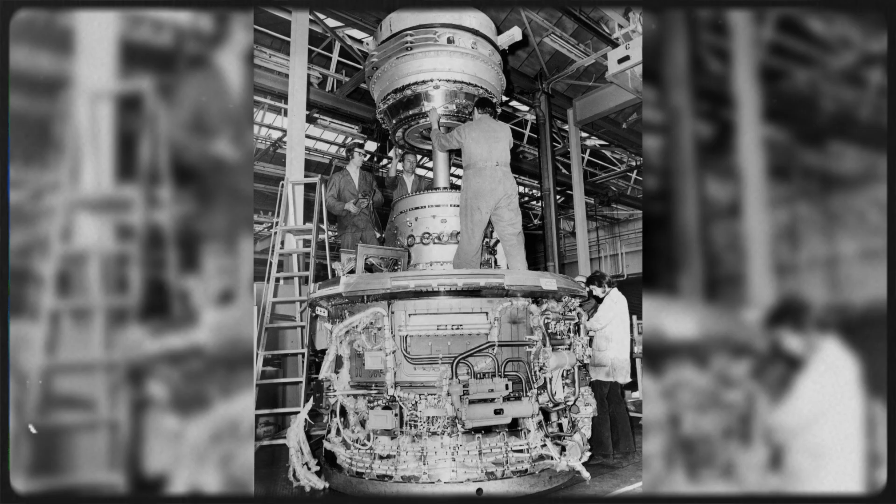In 1960, on the concrete apron of London Heathrow, British mechanics prepared a massive cylinder of aluminium and steel for installation. It was the Rolls-Royce Conway, built in the Midlands by an engineering culture that had defined the sound of the Second World War. But this engine was not being bolted onto the wing of a British airliner. It was being fitted into the nacelle of a brand-new American Boeing 707.

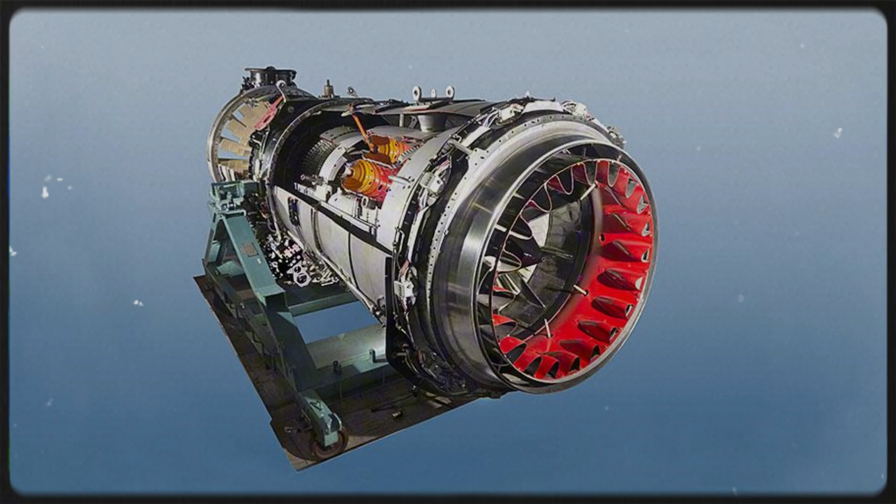This was not merely a transatlantic export order. The Conway was the first commercial turbofan engine in the world. By splitting the intake air, forcing a portion through the fiery combustion core, and bypassing the rest smoothly around the outside, Rolls-Royce had instantly made earlier, deafening pure turbojets obsolete. It delivered unmatched fuel economy and thrust, finally giving American airframes the true intercontinental range that global fleets demanded.

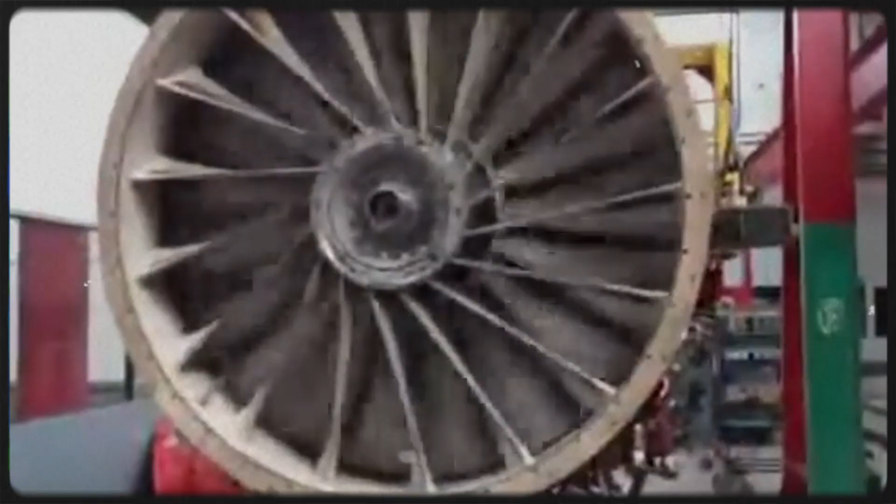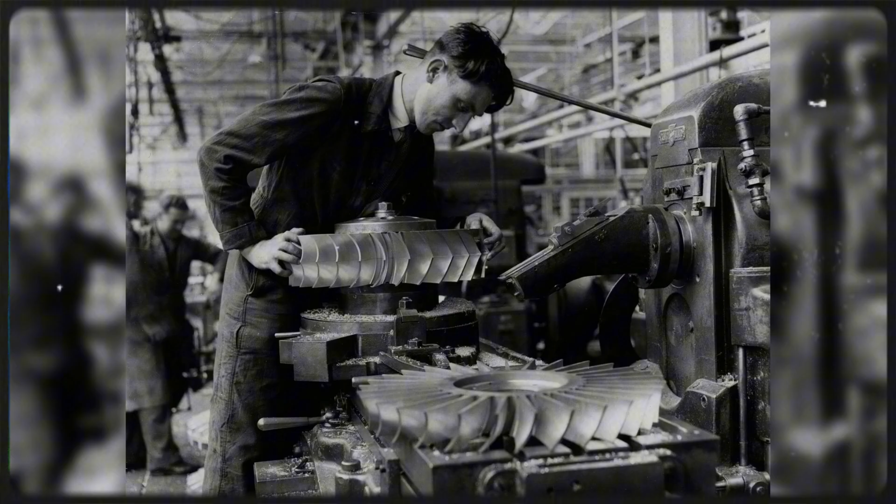For the engineers in Derby and the maintenance crews working on the Heathrow tarmac, the Conway represented absolute technical supremacy. They had solved the mathematical limits of the early jet age. Yet, beneath this mechanical triumph, a quiet industrial surrender had occurred. British foundries and machine shops were now supplying the heart of the very American aircraft that would soon dismantle Britain's own commercial aviation ambitions. That was the paradox of the Conway.

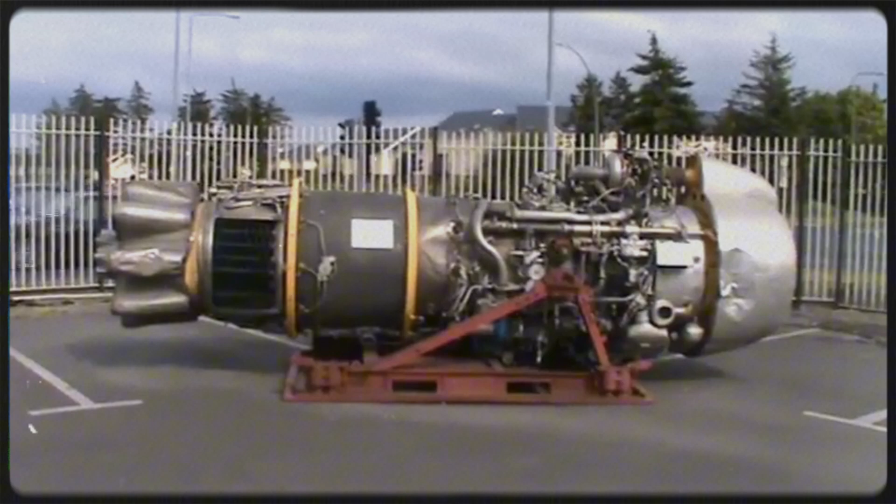Britain had cracked the bypass code. The engine ran quieter, flew further, and dictated the new economics of global passenger travel. But the British industry was about to learn a brutal lesson in economies of scale. Owning the invention did not mean possessing the power to control the market. But the real story of the Rolls-Royce Conway is not only the story of a technological first, it is the story of how Britain built the bridge to the modern jet age, only to find they could not afford to cross it alone.

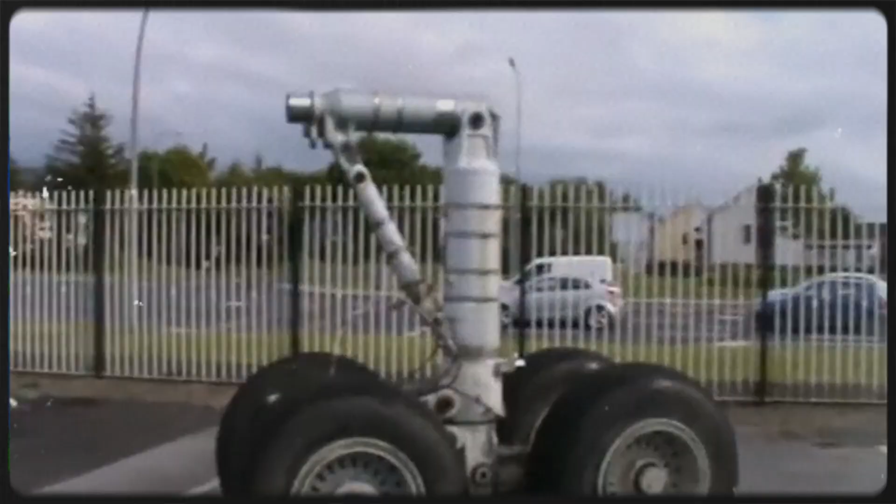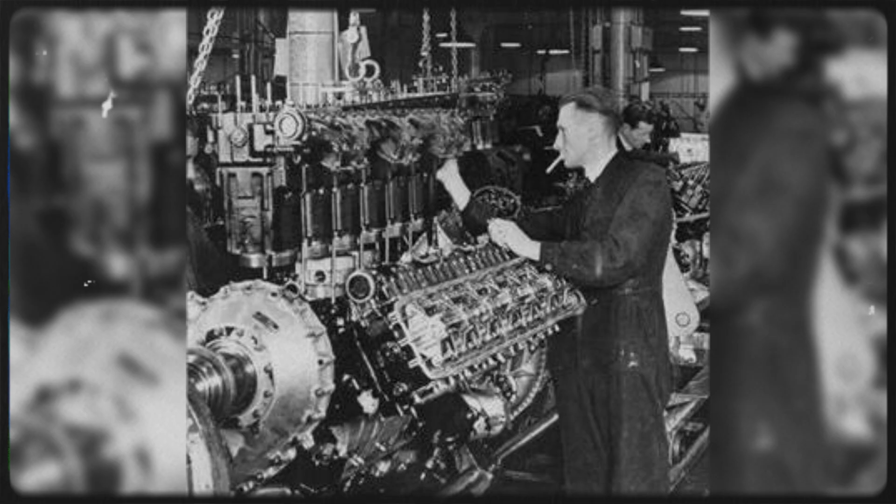The story begins not with nostalgia, but with a specific place. In a Derby test facility, in 1946, the story of the Conway begins in the town of Derby in the late 1940s, inside the engineering offices of Rolls-Royce. Derby was not merely a manufacturing base, it was the foundry of British aviation power, the industrial heartland that had produced the Merlin piston engine and kept the country in the sky during the Second World War.

But the piston engine era was ending. The future belonged to the jet engine, a turbine engine that produces thrust by accelerating air and exhaust gases. The early jet age was defined by the pure turbojet. A pure turbojet works by sucking all incoming air into the compressor, forcing every ounce of it through the combustion chamber and blasting it out the back as a high-velocity exhaust stream.

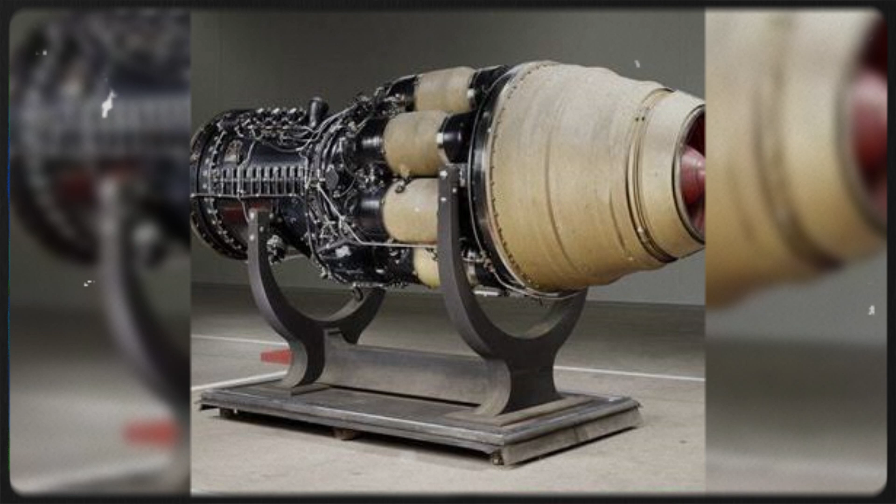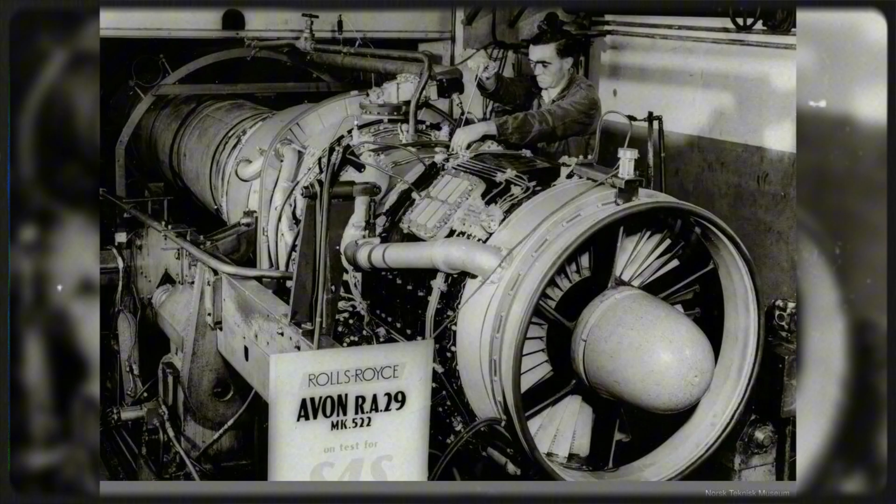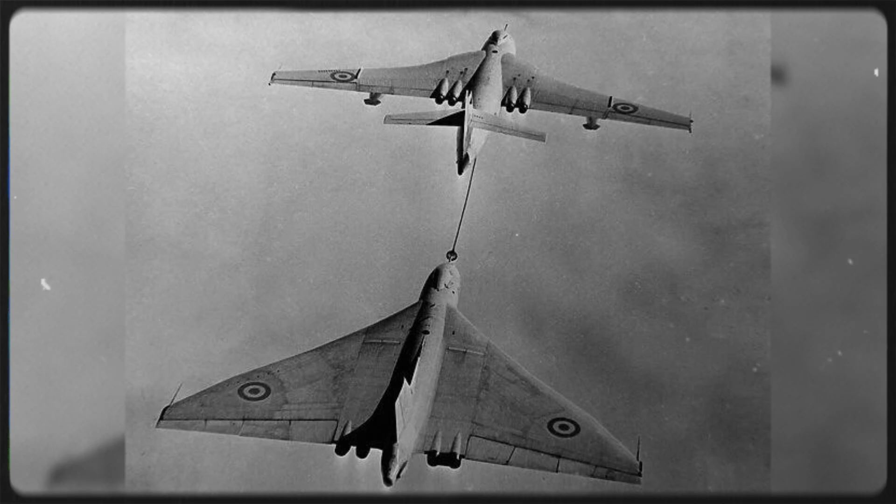It was a brutally simple way to make an aircraft go fast, and Rolls-Royce had mastered it with engines like the Avon. But the pure turbojet had a fatal industrial flaw. It was immensely loud, and it consumed fuel at a staggering rate. In the austere, rationing-heavy years of post-war Britain, fuel efficiency was not an environmental concern. It was a matter of strategic survival.

The Royal Air Force was developing its V-bomber force, a fleet of strategic nuclear bombers designed to carry heavy payloads deep into Soviet territory and return safely. The most advanced of these was the Handley Page Victor, a sweeping, crescent-winged heavy bomber that needed to fly higher, faster, and further than any British aircraft before it. The pure turbojets of the era simply drank too much aviation fuel to guarantee that intercontinental range. Britain needed a mechanical solution that did not yet exist.

The answer came from Dr. Alan Arnold Griffith, a brilliant and notoriously uncompromising aerodynamicist at Rolls-Royce. Griffith had been exploring a theoretical concept known as the bypass principle since the 1940s. His idea was elegantly counterintuitive.

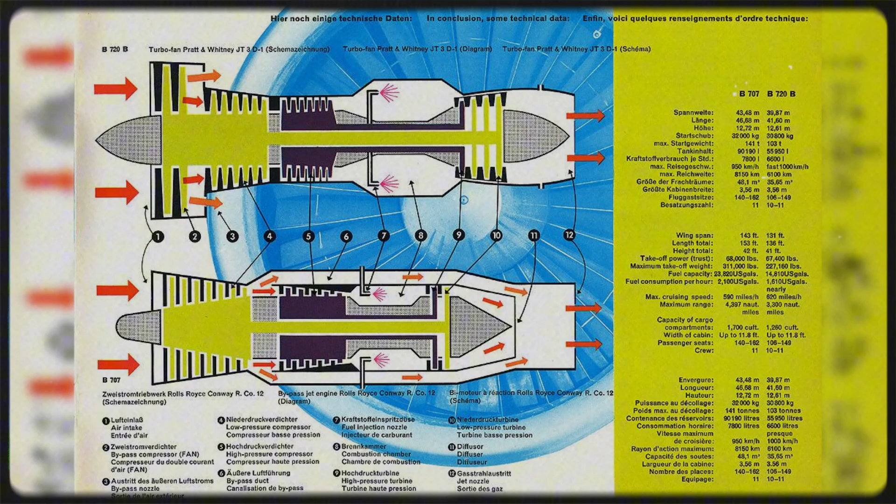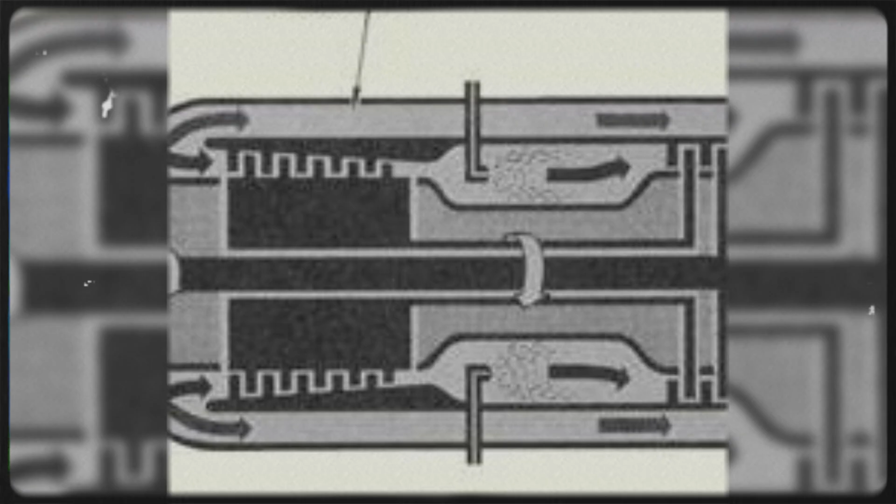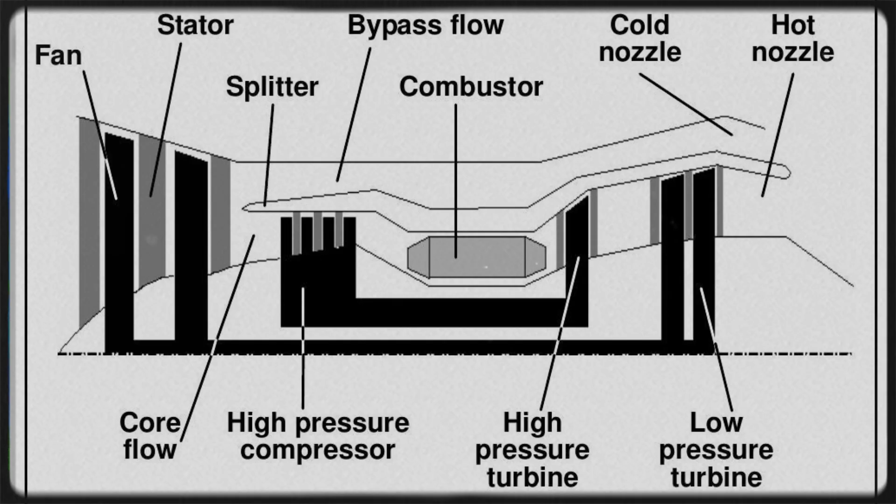Instead of forcing 100% of the ingested air through the fiery combustion core, the engine would have a larger front compressor. A portion of the air would be compressed and fed into the core to be burned, while the remainder would literally bypass the core, flowing through an outer duct before mixing with the hot exhaust at the rear. This cooler, slower bypass air would wrap around the hot, fast exhaust like a sleeve. The physics dictated that moving a larger mass of air at a slower speed was far more fuel efficient than moving a small mass of air at a very high speed.

It also had a secondary, almost accidental benefit. The layer of slower bypass air muffled the violent shear of the exhaust, making the engine significantly quieter. But a theory on a chalkboard in Derby was not a working machine. To build a bypass engine, Rolls-Royce could not use a simple, single-shaft layout.

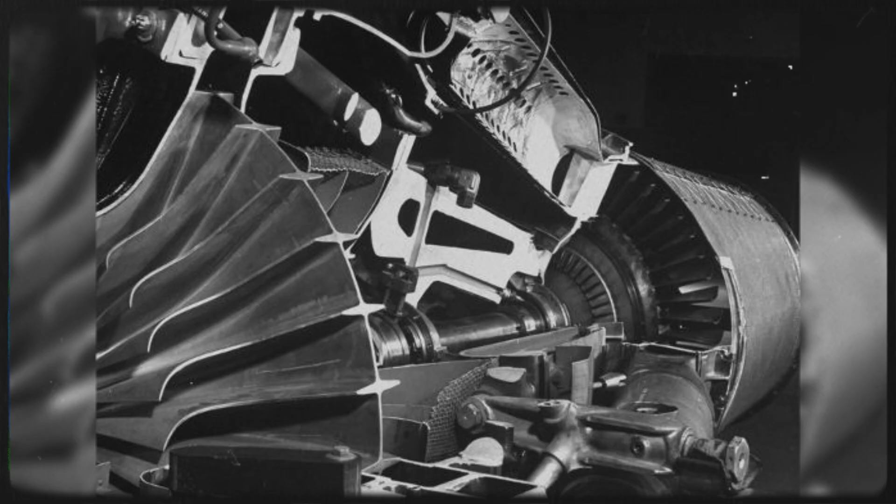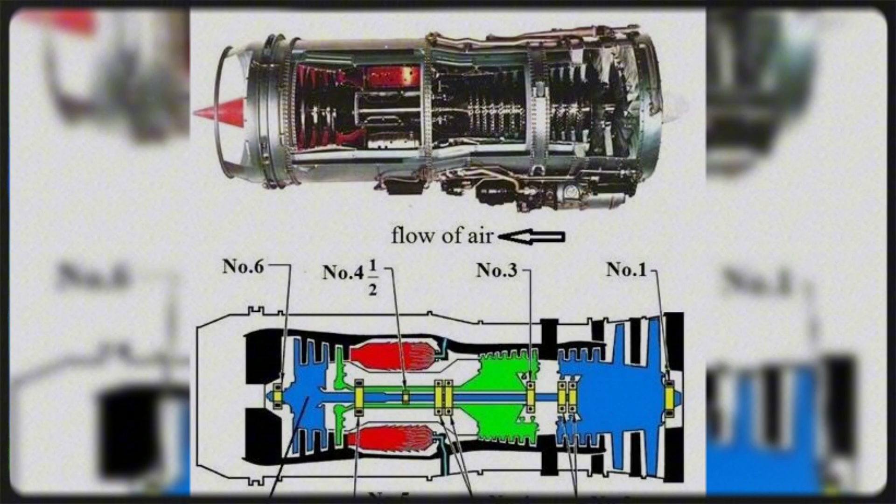The engine required a twin-spool design, an internal layout using two concentric shafts, allowing the low-pressure compressor at the front and the high-pressure compressor in the core to spin at different, optimal speeds. This meant placing a rapidly rotating metal shaft inside another rapidly rotating metal shaft, all operating under immense heat and stress. It demanded unprecedented precision from the foundries and machine shops of the Midlands.

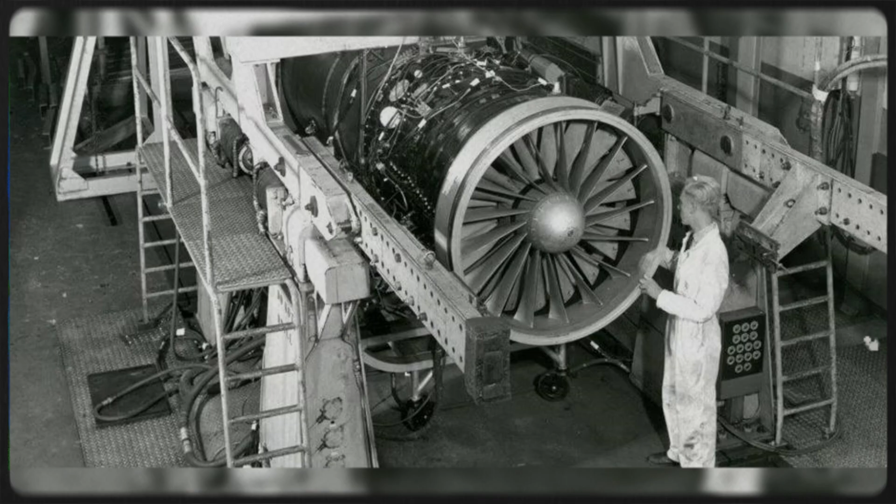The metal had to be cast perfectly. The bearings had to survive. The service network of RAF mechanics would have to learn how to maintain an entirely new architecture of power. The physical reality of the Conway began to take shape on the test stands. In October 1952, the first prototype, designated the RCO-2, was fired up in Derby.

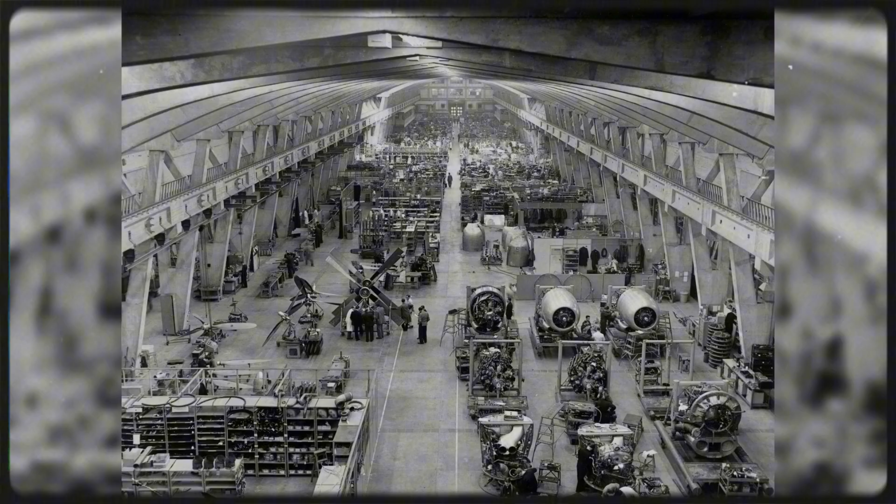It produced just 10,000 pounds of thrust, a measurement of how much forward-pushing force the engine could generate. It was a modest figure, and the prototype was plagued by the complexities of its twin-spool bearings and internal sealing. But it proved that the mathematics of the bypass principle were sound. The fuel consumption was undeniably lower than any comparable turbojet.

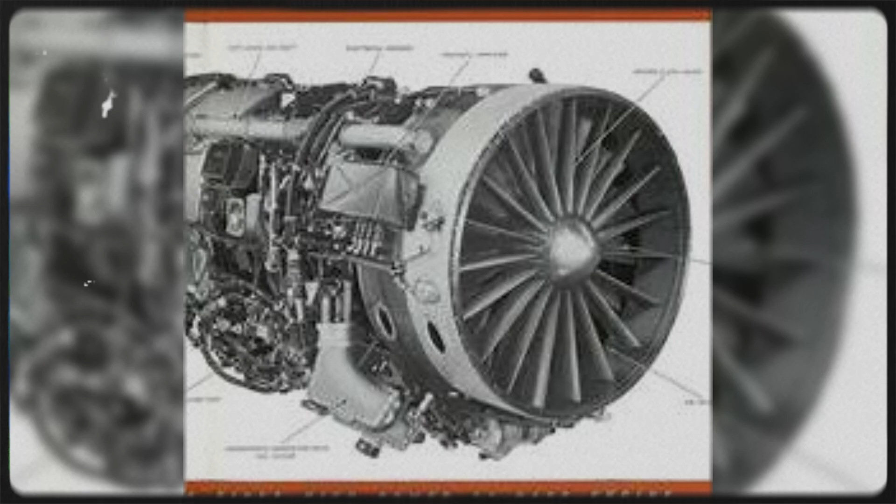Rolls-Royce pushed the development forward, scaling the architecture to handle more air and more heat. By 1956, the design had evolved into the RCO-11, an engine capable of producing 17,250 pounds of thrust. This was the breakthrough the military needed. The RCO-11 was ordered into production for the Handley Page Victor B-2, giving the RAF the long-range strategic reach it had demanded. The Conway was officially a working piece of British defence infrastructure, integrated into airfields, maintenance hangars, and the daily routines of military mechanics.

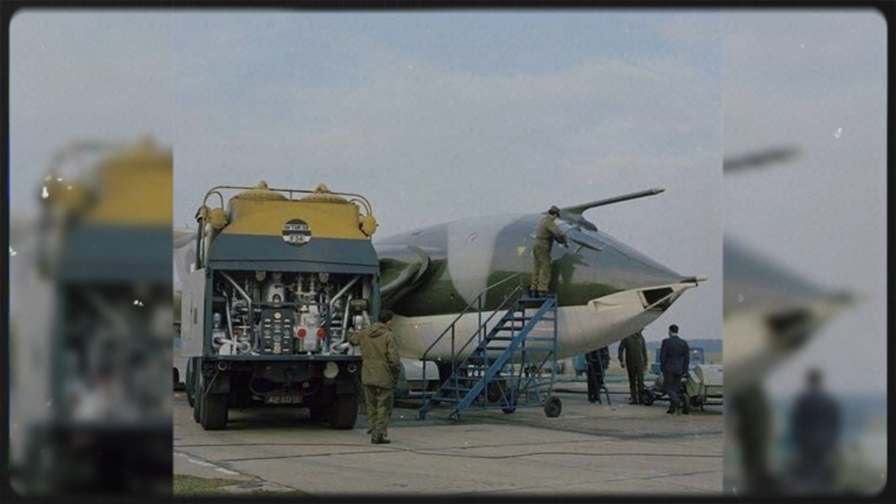But military contracts alone do not build global industrial empires. As the Conway was being perfected for the bombers of the RAF, the commercial aviation market was experiencing a violent shift. Across the Atlantic, American manufacturers Boeing and Douglas were designing the 707 and the DC-8, the first generation of large intercontinental passenger jets. The airlines buying these aircraft had a very specific economic problem. They wanted to fly passengers across the Atlantic Ocean, from London to New York, without stopping to refuel in Newfoundland or Ireland.

The pure turbojets offered by American engine manufacturers, such as the early Pratt & Whitney JT3C, were struggling with the exact same physics the RAF had faced. They were too loud for civil airports, with strict noise regulations, and they were too thirsty to guarantee a non-stop transatlantic crossing with a full payload of paying passengers.

In Derby, the engineers realized that Griffith's military project was actually the exact solution to the global airline industry's most expensive problem. The Conway was no longer just a classified bomber engine. It was a product ready for export, built by a Midlands workforce that suddenly held the key to the global commercial jet age. The theory was proven on the test stands in Derby. Britain now had to convince the world that the future of flight lay not in pushing all the air through the fire, but in letting some of it slip quietly around the sides.

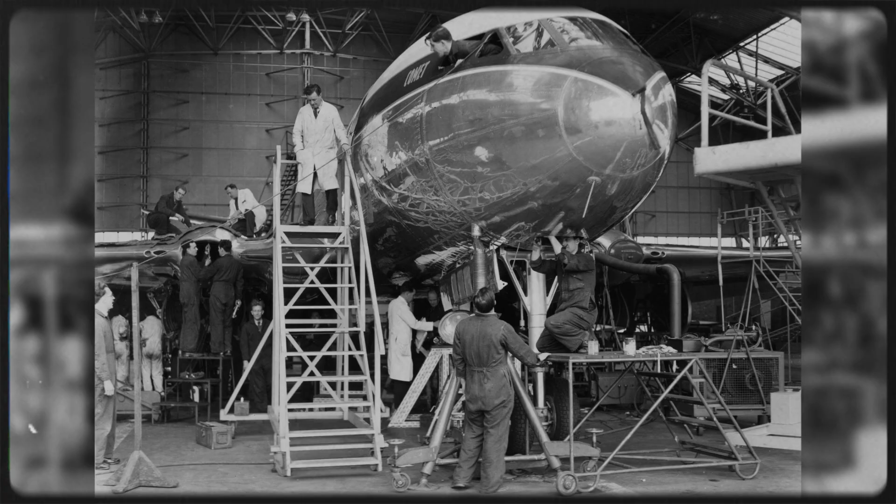To understand what the Rolls-Royce Conway achieved, you must stand not in a laboratory, but on the concrete apron of a British Overseas Airways Corporation, or BOAC, maintenance hangar at London Heathrow in the late 1950s. At that time, the sound of the jet age was defined by the pure turbojet. Engines like the Rolls-Royce Avon or the American Pratt & Whitney JT3C produced thrust with a violent, concentrated scream that rattled the windows of terminal buildings and shook the tools on a mechanic's workbench. They were magnificent, but they were viciously loud and notoriously thirsty.

When the Conway arrived on the tarmac, the sensory experience of British aviation fundamentally changed. The Conway was a turbofan, a jet engine that moves much of its air through a large fan, improving efficiency and thrust. More specifically, it was a low-bypass turbofan. To a mechanic standing near the runway, the difference was immediately audible. The high-pitched, tearing shriek of the pure jet was replaced by a deeper, heavier roar.

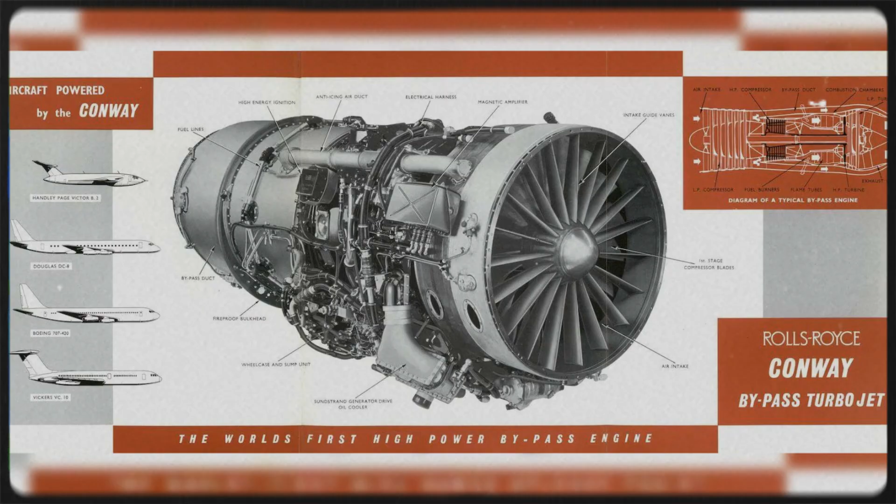The physics of Dr. A. A. Griffith's design were acting as an acoustic blanket. By wrapping a sleeve of cooler, slower-moving air around the incredibly fast, white-hot exhaust of the engine core, the Conway muffled the violent shearing effect where the exhaust met the static atmospheric air.

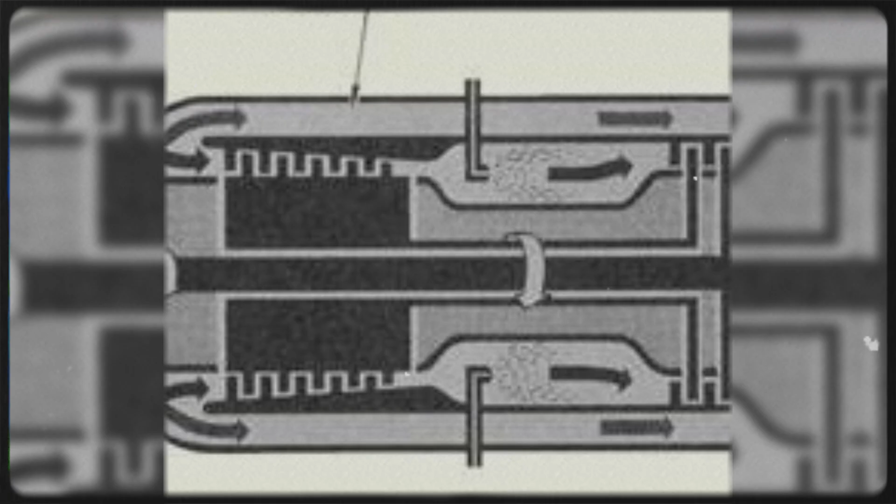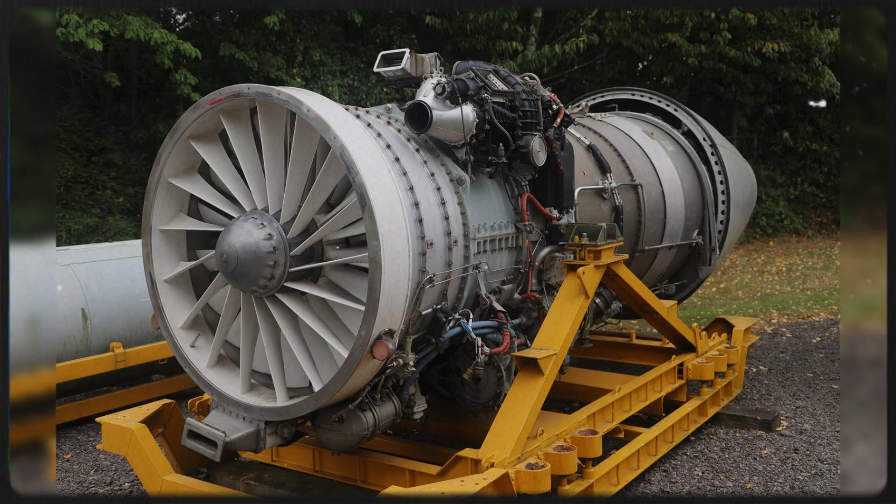This acoustic shift was driven by the engine's bypass ratio, the mathematical relationship between the volume of air directed around the core and the volume of air forced through it to be burned. In the early commercial Conway, this ratio was roughly 0.3 to 1. By modern standards, this is a tiny bypass volume, but in 1959, it was a revolution. It meant that Rolls-Royce had found a way to extract more pushing force from every gallon of aviation fuel.

But this breakthrough in thermodynamics demanded a heavy price in mechanical complexity. For the service network, the dealers, mechanics, parts suppliers, and manuals that keep a machine running after purchase, the Conway presented an entirely new world of maintenance.

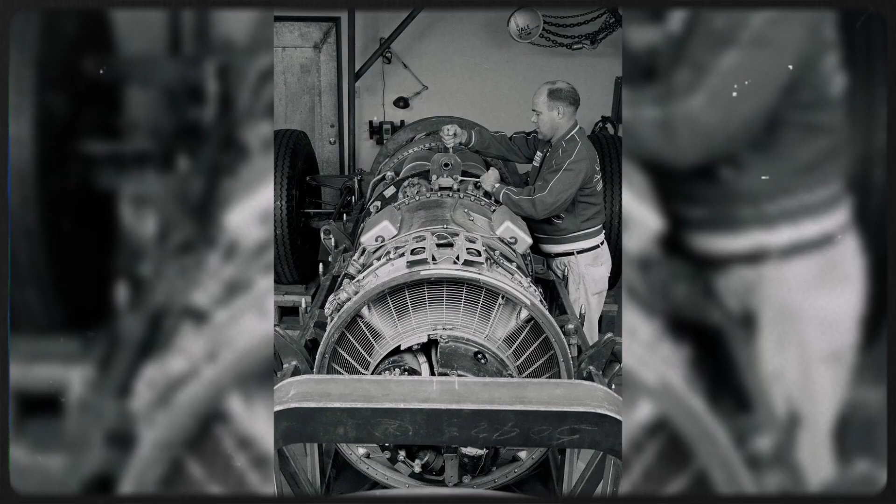A pure turbojet relied on a single rotating shaft. The Conway relied on a twin-spool architecture. It contained a low-pressure shaft running directly through the hollow center of a high-pressure shaft. In a British workshop or hangar, this meant that an overhaul, a major service process where an engine is taken apart, inspected, and rebuilt to operating standards, suddenly required a much higher degree of precision.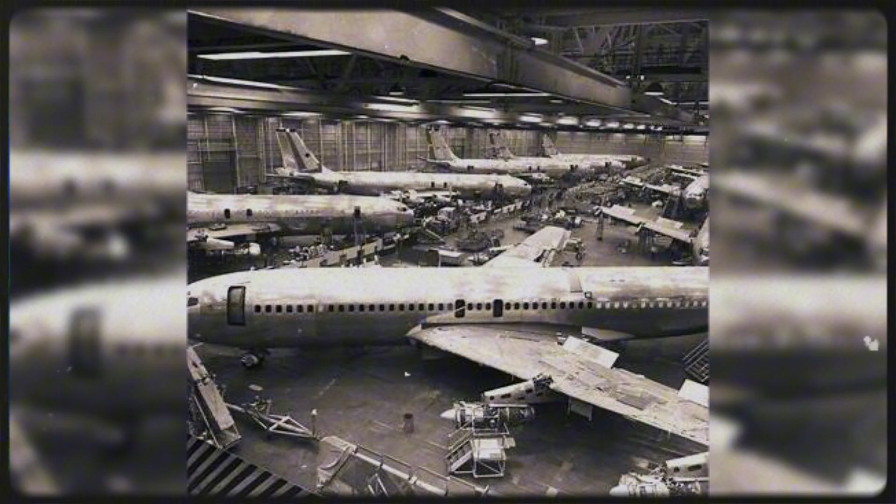The internal bearings had to support two shafts spinning at different speeds, enduring the intense heat of the combustion chamber while maintaining perfect balance. If the machining in Derby was imperfect, or if the mechanics at Heathrow failed to align the components exactly, the engine would tear itself apart in the sky. It was a massive leap of faith for airlines to trust this unprecedented complexity. The validation of that trust came not from British aircraft manufacturers, but from the Americans.

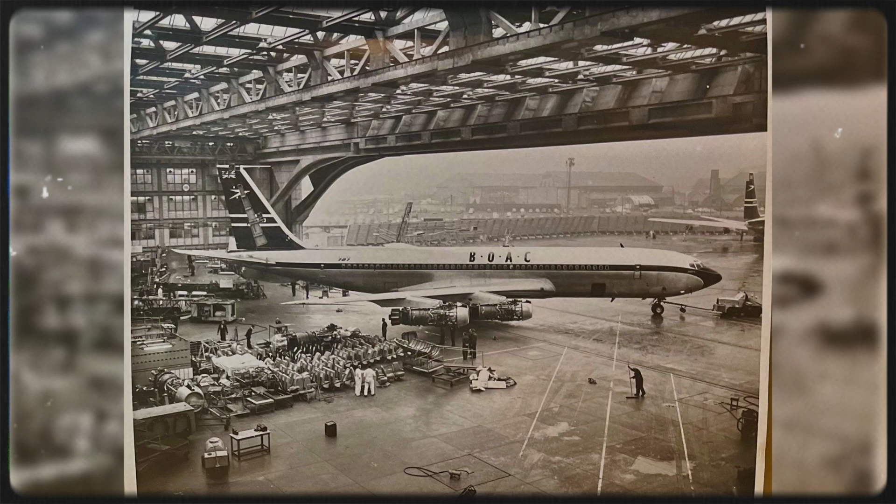In Seattle, Boeing was trying to sell its new 707 airliner. In California, Douglas was marketing the DC-8. Both aircraft were heavy, and both were initially fitted with Pratt & Whitney JT3C pure turbojets. The American engines were reliable, but they lacked the fuel economy required to reliably fly a full payload of passengers from London to New York against the strong winter headwinds of the North Atlantic. Without a refueling stop in Gander, Newfoundland, the early American jets struggled to make the distance.

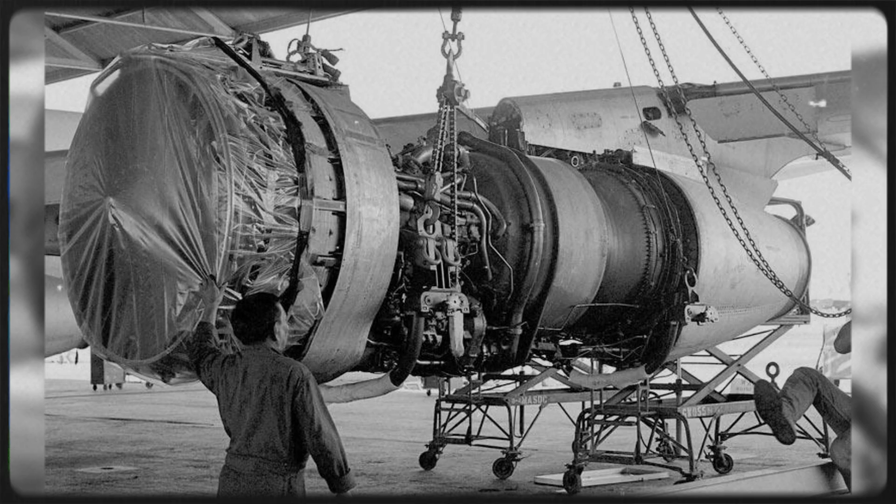Rolls-Royce offered the American manufacturers a mathematical advantage they could not refuse. The commercial variant of the engine, the Conway RCo.12, produced 17,500 pounds of thrust, yet it weighed less and burned significantly less fuel than its American competitors. The equation was simple. Lower fuel consumption meant less fuel weight in the aircraft's tanks, which meant the airlines could sell more tickets and carry more paying passengers over the ocean. The breakthrough fundamentally altered global airline economics.

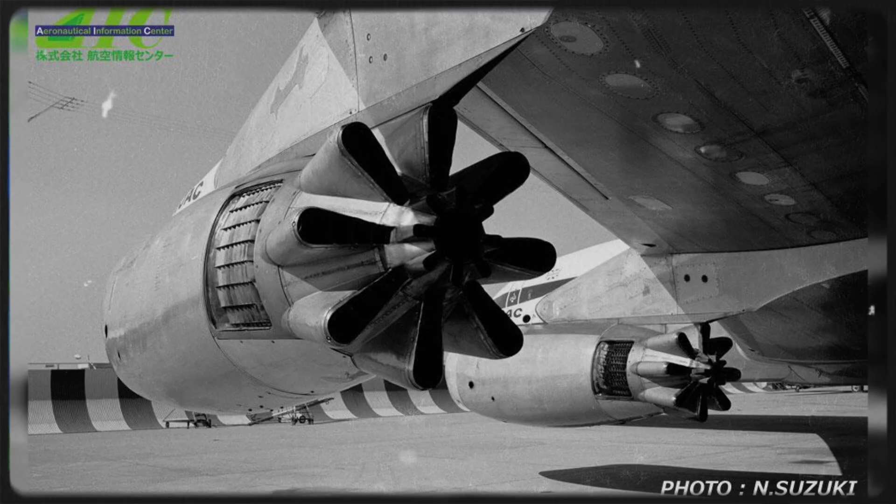When BOAC ordered its fleet of Boeing 707s, it naturally demanded British power, resulting in the Boeing 707-420 series. But the true victory for Derby was the export market. Trans-Canada Airlines, Lufthansa of Germany, and Alitalia of Italy all looked at the operating costs of the American pure turbojets and chose to buy their Boeing and Douglas airframes fitted with Rolls-Royce Conways. For a brief, shining moment, the foundries and machining lines of the Midlands were dictating the pace of global transport.

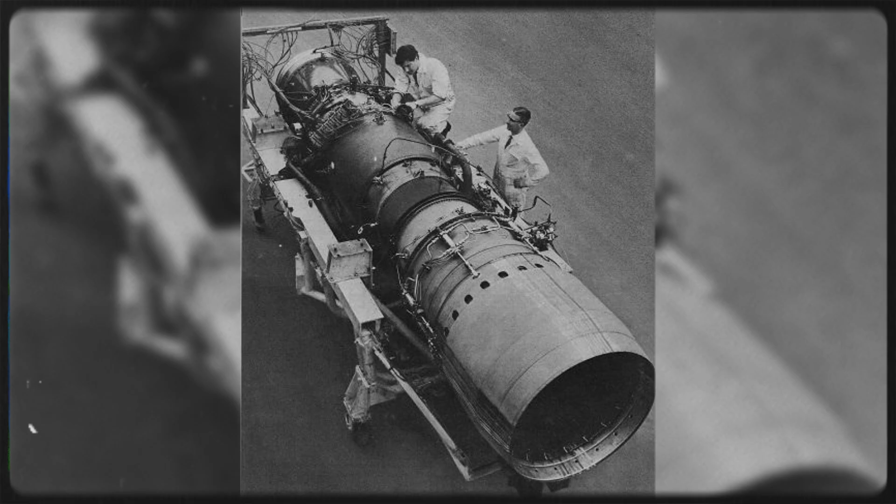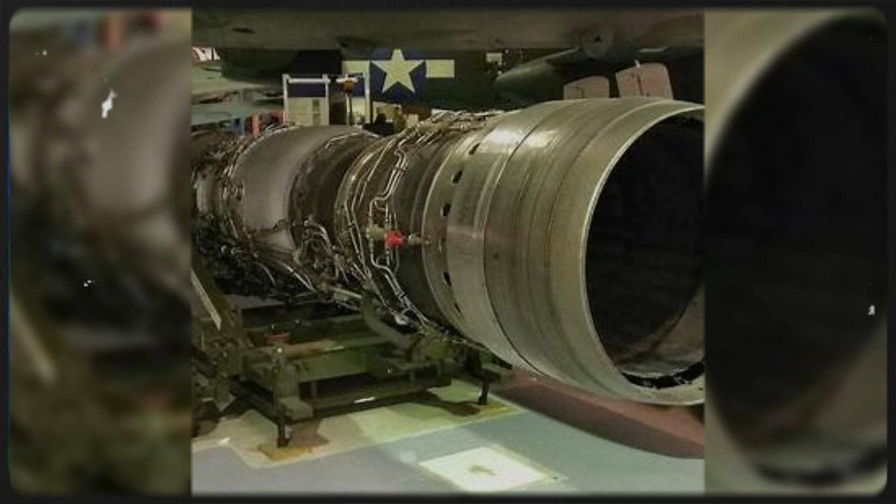British engineers had successfully scaled a highly complex military bomber engine into a reliable commercial product. They had exported their physical engineering into the engine nacelles of their most dangerous foreign competitors. The Conway had proven that the bypass principle was not just a theory. It was the only logical future for heavy commercial flight. The engine had changed the mathematics of global travel. But the breakthrough had exposed Rolls-Royce to a battlefield where brilliant engineering was no longer enough to guarantee survival.

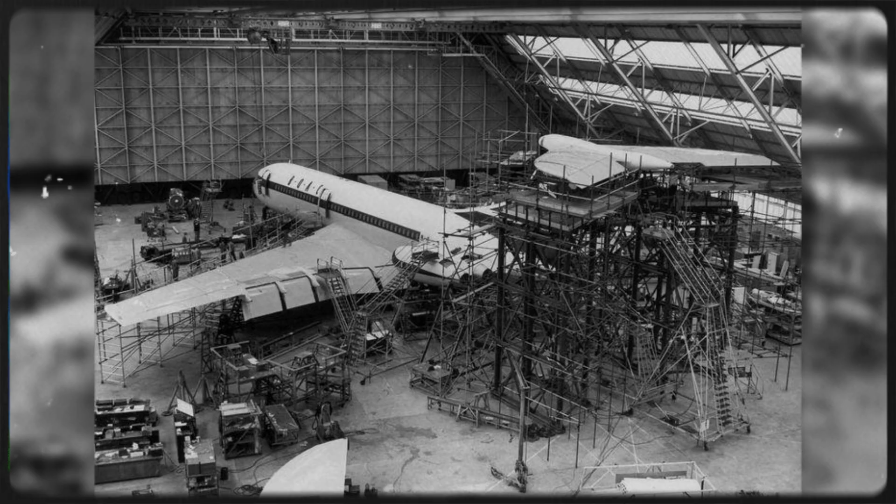By the early 1960s, the Rolls-Royce Conway had moved from an engineering experiment to an absolute industrial triumph. It was no longer just a piece of military hardware. It was the acoustic signature of British commercial ambition. To witness this peak, one only needed to stand at the edge of London Heathrow or wander through the massive maintenance hangars of the British Overseas Airways Corporation. The crowning achievement of this era was the Vickers VC10.

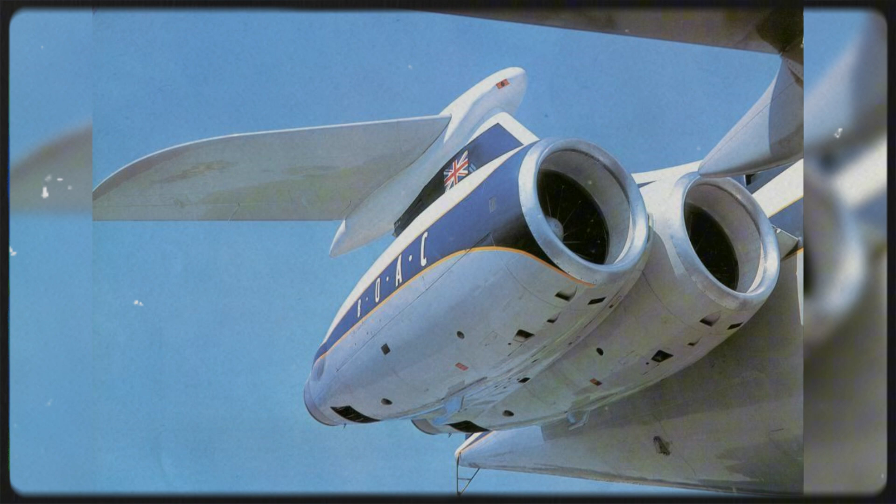Introduced into BOAC service in April 1964, the VC10 was a heavy, swept-wing airliner designed specifically for the hot and high airports of the fading British Empire, places in Africa and the Middle East, where thin air and scorching temperatures made generating lift brutally difficult. Vickers solved this by giving the aircraft a massive, aerodynamically clean wing. But that wing required the engines to be mounted at the rear of the fuselage. The aircraft was fitted with four Rolls-Royce Conway RCo.42 turbofans, producing an immense 21,000 pounds of thrust each.

When a fully laden VC10 pushed the throttles forward for takeoff, it did not scream with the tearing shriek of the early American 707s. It delivered a deep, resonant, ground-shaking roar. The cooler bypass air, the very principle Dr. Griffith had championed in Derby, wrapped around the white-hot core exhaust, creating a smoother, quieter departure. For the passengers inside the cabin, the rear-mounted engines meant they flew in an eerie, luxurious silence. For the mechanics on the tarmac, the Conway meant absolute pride.

In the hangars, British fitters, machinists, and engineers were maintaining a machine that outperformed anything built in Hartford or Seattle at that moment. In a Britain where an aero engine could decide whether an aircraft lifted from a grass airfield, a lorry made its delivery, a motorcycle carried a rider through the night, a bus left the depot, a racing car survived the next lap, or a luxury car kept its silence at speed, power was not an abstraction. It was metal, fuel, labor, heat, sound, repair, risk, and trust. The trust in the Conway was absolute. It was not just BOAC flying the VC10. The Royal Air Force adopted it for their strategic transport fleet.

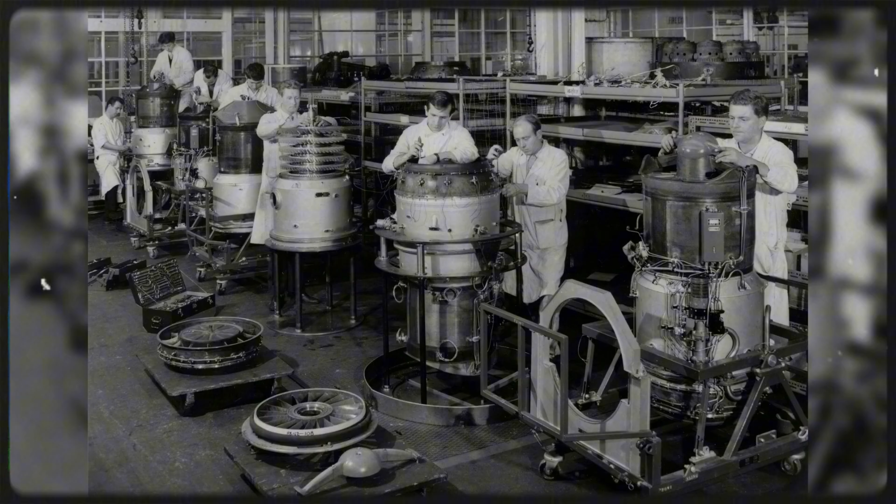By the mid-1960s, the factory floor at Derby was a landscape of intense, rhythmic industry. Thousands of skilled workers, from pattern makers in the foundries to the final inspectors on the test stands, owed their livelihoods to the bypass principle. The Conway had proven that British engineering could dictate the technological direction of the global passenger fleet.

The engine evolved aggressively, to meet the insatiable demands of the airlines. The early RCo.12 had delivered 17,500 pounds of thrust. The RCo.42 for the VC10 pushed that to 21,000 pounds. Eventually, the RCo.43, the final and most powerful iteration, achieved 21,800 pounds of thrust for the Super VC10. Every increase required the metallurgy to withstand higher temperatures, the compressors to spin faster, and the bypass ratio to be carefully managed.

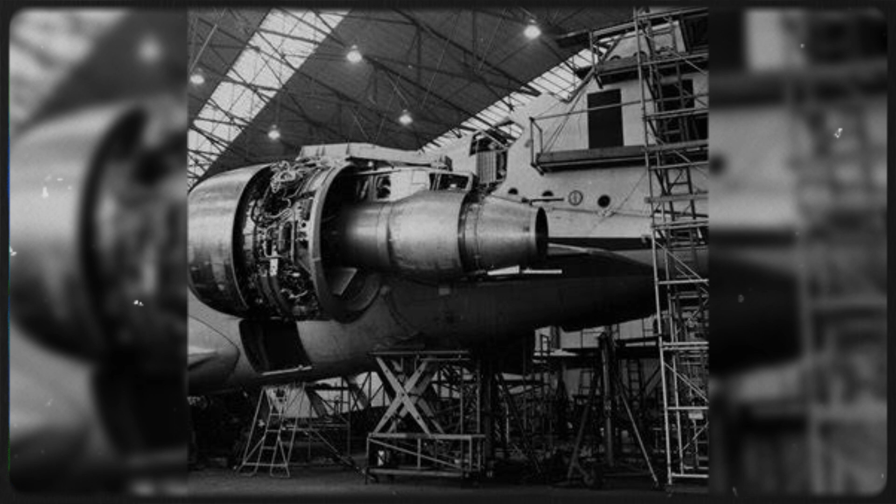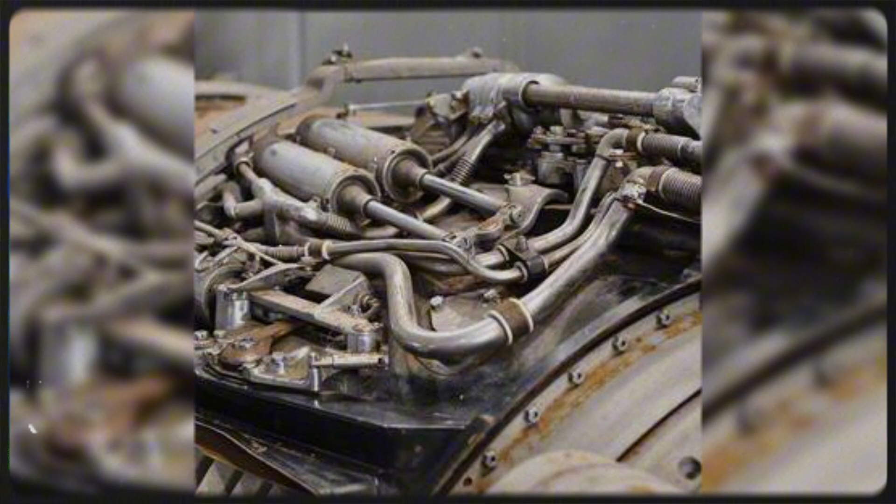The physical presence of the Conway, gleaming on an engine stand before being hoisted into a nacelle, was undeniable proof that the Midlands had survived the end of the piston era and conquered the jet age. The engine was a triumph of metal, fuel, and thermodynamics. But the limits of those thermodynamics were already waiting in the shadows. The dominance of the Conway was not measured purely in thrust. It was measured in time.

In the aviation business, an engine that requires frequent teardowns is a financial liability, no matter how powerful it might be. In the overhaul shops of BOAC at London Heathrow, the Conway proved its ultimate worth. The time between overhaul, the metric dictating how many hours an engine could safely remain attached to the wing before requiring a complete strip-down and internal inspection, began to climb at a staggering rate. Early pure turbojets had required major maintenance every few hundred hours, constantly frustrating airline schedules.

But the Conway's cooler outer casing and highly refined twin-spool architecture meant its internal components suffered far less thermal fatigue. Soon, the Conway was authorized to run for over 4,000 hours between shop visits, a number that would continue to rise. For airlines, this was a financial revelation. A Vickers VC10 or a Conway-powered Boeing 707 could cross the Atlantic, turn around at John F. Kennedy International Airport, and fly back to London day after day with absolute predictability.

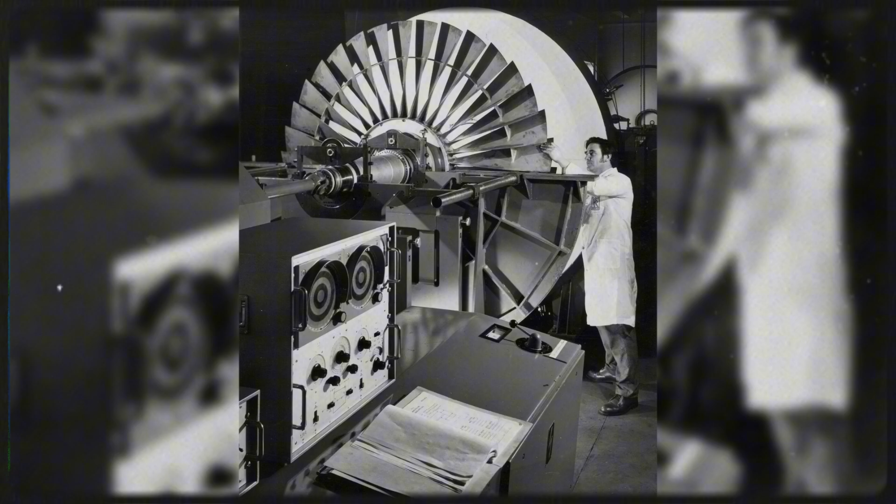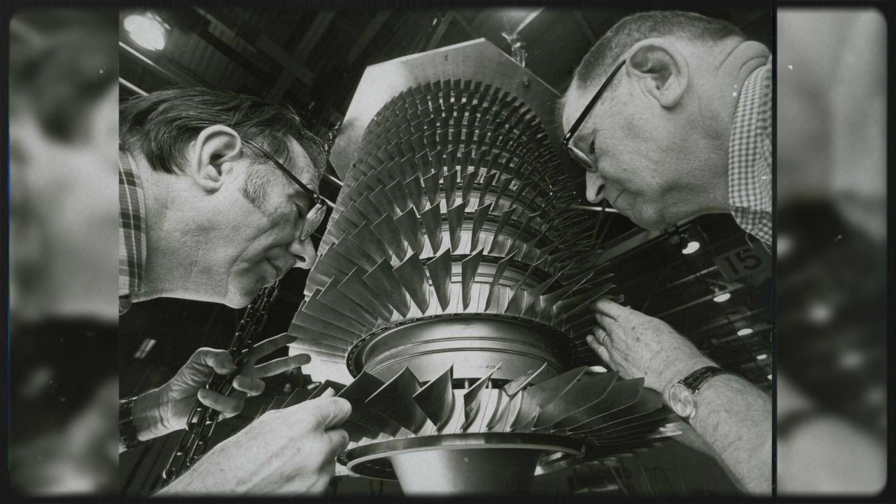The scale of Rolls-Royce's achievement began to reshape the industrial landscape of the Midlands. The Derby Works expanded to handle the global demand, creating a sprawling, deeply interconnected supply chain. Building a Conway required more than just assembly lines. It required specialist foundries pouring high-temperature alloys for the turbine blades. It required machinists working to tolerances measured in fractions of a thousandth of an inch.

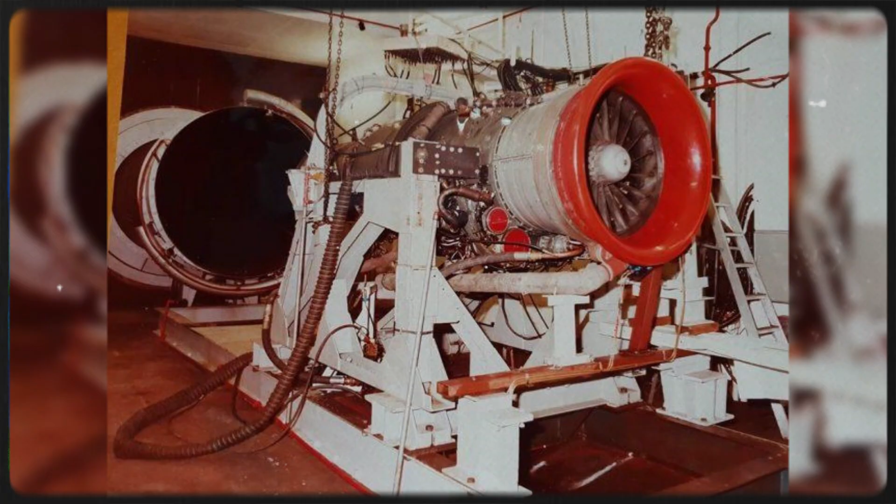It required massive test cells where the engines were strapped down, run at maximum redline, and meticulously calibrated before being certified for passenger flight. Every time a Conway was crated and shipped out of the factory doors, it carried the livelihood of thousands of British workers with it. The engine had become an export powerhouse, generating vital foreign currency for a nation still recovering from the economic exhaustion of the post-war years. Alitalia, Canadian Pacific, and Lufthansa were not buying British patriotism. They were buying a mathematically superior tool for global transport, and the Midlands was the only place on Earth that could supply it.

By the mid-1960s, the Conway reached its zenith with the introduction of the Super VC10. Fitted with four Conway RCo.43 engines producing 21,800 pounds of thrust each, the Super VC10 became the fastest subsonic transatlantic airliner in the world. It was capable of crossing from London to New York faster than any American competitor. When a Super VC10 roared down a runway in Kenya, Hong Kong, or London, the sound it produced was a declaration that Britain still held the mechanical high ground.

The bypass principle had fundamentally won the argument. The future of flight was not a pure, screaming jet of exhaust. It was a carefully managed flow of primary and secondary air, a delicate thermodynamic balance conceived by Dr. A. A. Griffith and forged by British labor. The Conway had achieved the ultimate industrial dream. It was indispensable to both the defense of the realm and the commercial expansion of the global airline industry. In a Britain where an aero engine could still define national prestige, the Conway was a triumph of metal and thermodynamics. But that exact thermodynamic balance was about to become a trap. The first crack in the Conway's global supremacy did not sound like a mechanical failure.

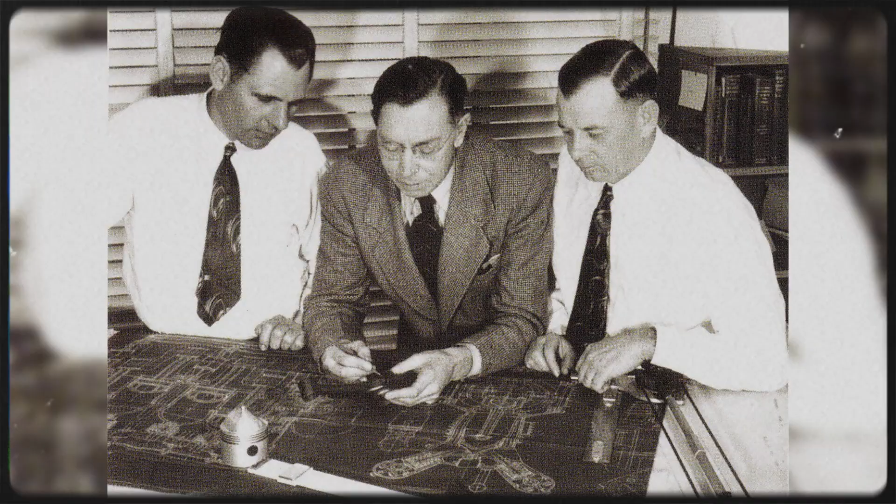It did not happen on a test stand in Derby, nor did it happen in the skies over the Atlantic. It happened on a drawing board in Hartford, Connecticut, where the American engine manufacturer Pratt & Whitney decided to counter the British threat, not with elegance, but with brute industrial pragmatism.

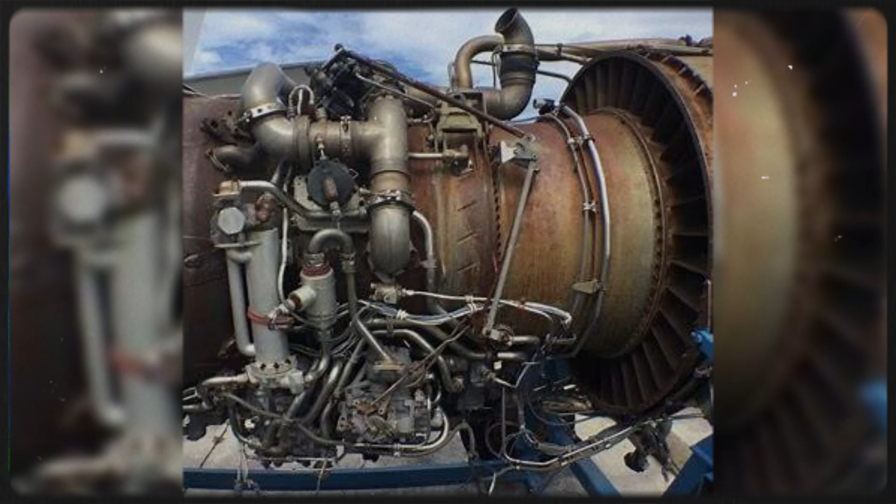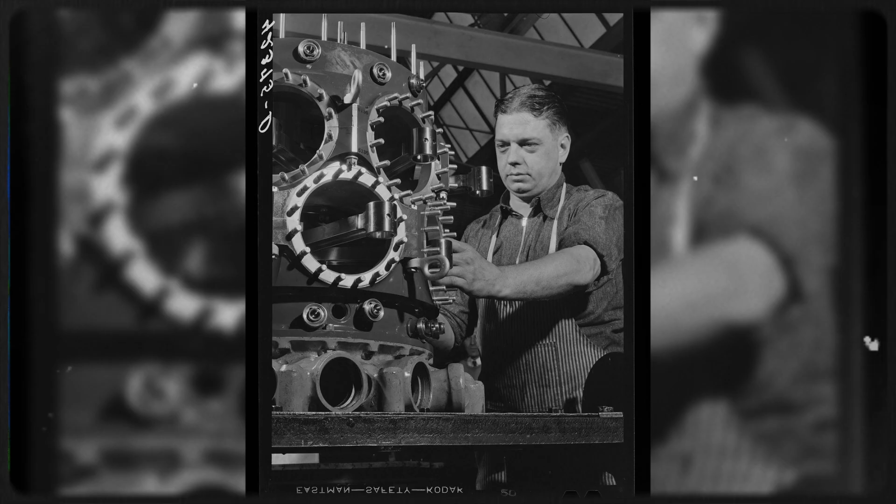Pratt & Whitney had watched Rolls-Royce conquer the early transatlantic market with the Conway. They knew their own pure turbojet, the JT3C, was too thirsty and too loud to compete with the British bypass principle. But rather than spending half a decade developing an entirely new twin-spool architecture from a blank sheet of paper, the Americans chose a faster, cruder solution.

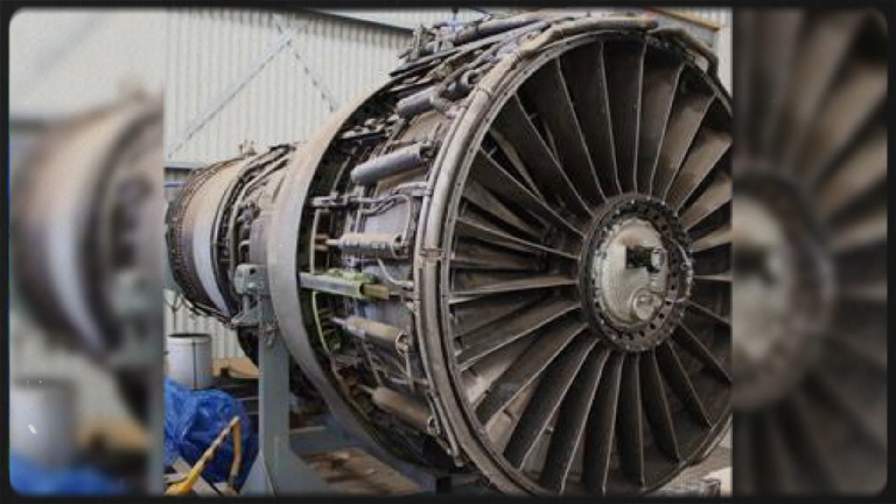They took their existing fuel-hungry pure jet, removed the first 3 stages of the compressor, and simply bolted a massive 2-stage fan onto the front. They designated this new creation the JT3D. It was heavier, physically bulkier, and lacked the deep, integrated thermodynamic refinement that Dr. A. Griffith had championed in the Midlands. But elegance does not dictate aviation economics.

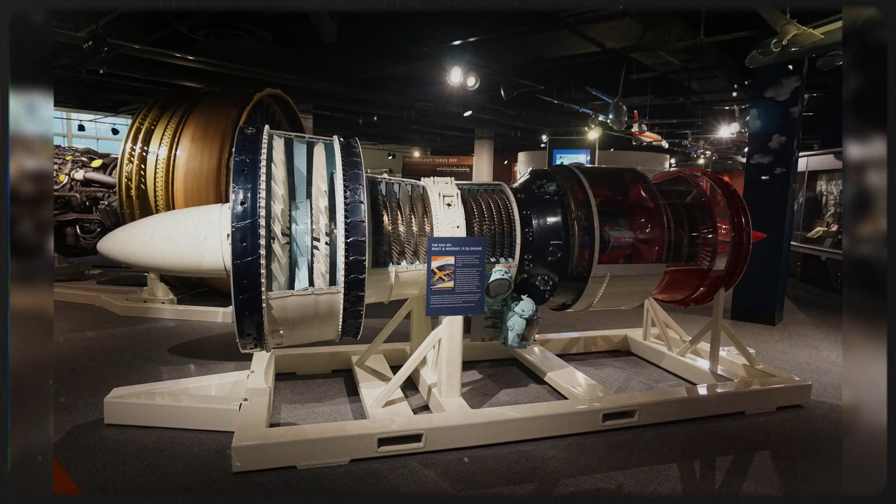Scale dictates aviation economics. The JT3D possessed a bypass ratio, the mathematical relationship between the volume of air bypassing the core and the air entering it to be burned, of roughly 1.4 to 1. The Conway, for all its brilliance, was locked at a much lower bypass ratio of around 0.3 to 1.

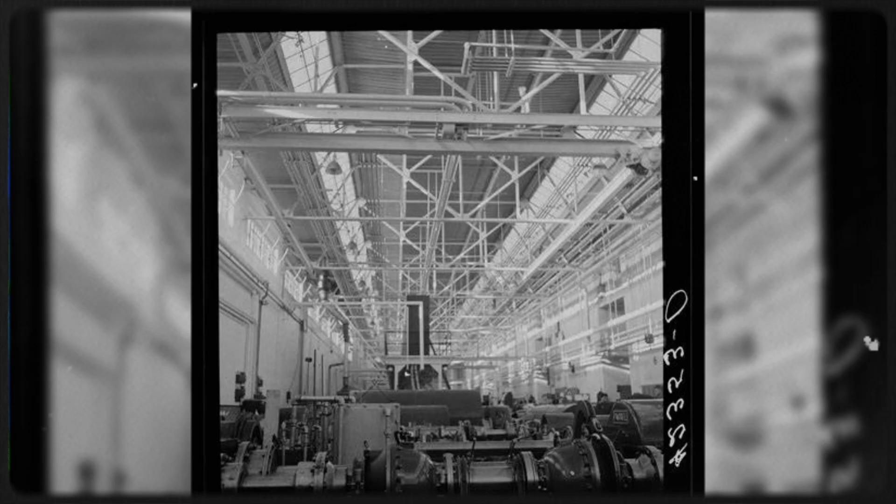By pushing a vastly larger volume of cool air around the outside of the engine, the crude American adaptation suddenly neutralized the British fuel advantage. It delivered more thrust for less fuel, and because it was based on an existing engine block, Pratt & Whitney could manufacture it rapidly and cheaply.

For the engineers and machinists in Derby, this American pivot presented an impossible engineering trap. The Conway was a victim of its own perfect proportions. The engine had been designed with a highly integrated core. The internal airflow, the shaft speeds, and the combustion chamber were perfectly matched to that specific 0.3 to 1 bypass ratio.

If Rolls-Royce wanted to increase the size of the fan to compete with the JT3D, they could not simply bolt a larger fan onto the front. The high-pressure core of the Conway was too small to drive a massive front fan, and the internal shaft dynamics were not designed to handle that kind of aerodynamic load. To beat the Americans, Rolls-Royce would have to redesign the entire engine.

The very thermodynamic balance that made the Conway so incredibly reliable, the feature that allowed it to stay on the wing for over 4,000 hours in BOAC service without an overhaul, now made it physically inflexible. It was a masterpiece trapped in its own geometry. The shift in the global market was swift and ruthless.

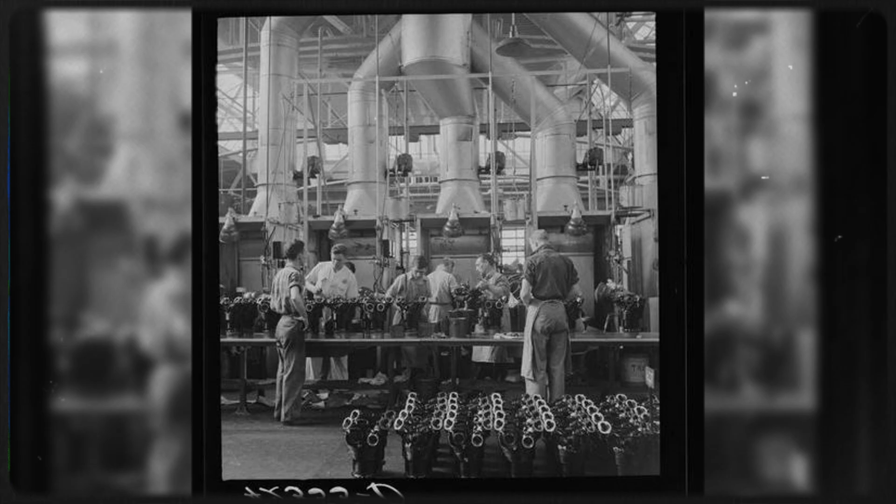This was the cruel reality of manufacturing costs and economies of scale. An engine could be beautiful, durable, and historically important, yet still lose if the component cycles and manufacturing agility of a rival moved against it. Pratt & Whitney had an enormous domestic military market funding their development, allowing them to amortize the costs of the JT3D across hundreds of airframes.

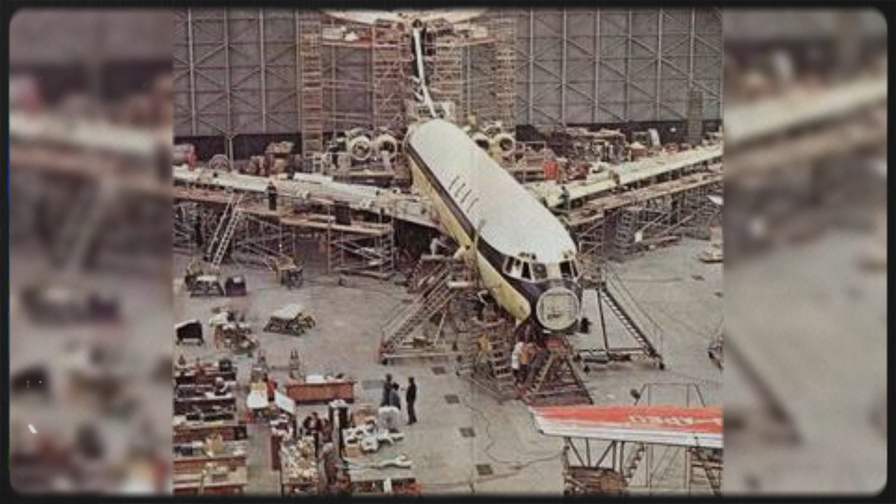Rolls-Royce, relying on the much smaller British domestic market and the dwindling RAF bomber fleet, simply did not have the capital to fight a war of attrition. The Conway was suddenly isolated. Its survival now depended almost entirely on the Vickers VC10.

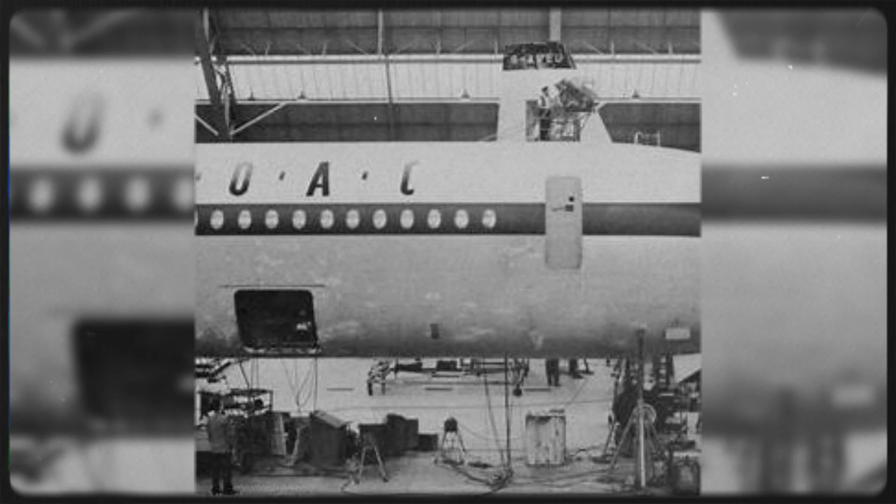But the VC10, despite its elegance and its popularity with passengers, was a heavy, expensive aircraft designed for short, hot runways in the fading outposts of the British Empire. Global airlines did not want an aircraft tailored for high-altitude African airports. They wanted the Boeing 707, which was optimized for the high-volume routes between New York, London, and Paris. As sales of the VC10 stalled, the demand for the Conway stalled with it.

In the maintenance hangars at London Heathrow, the British service network continued to treat the engine with absolute reverence. The mechanics knew they were working on a machine that rarely failed, a power plant that had taught the world how to cross oceans quietly. But outside the hangar doors, the industry had bypassed them. The engine still worked perfectly. The industrial war it was built to win had already been outsourced to the other side of the Atlantic.

The retreat of the Conway from the global commercial market was not an overnight collapse. It was a slow, mathematical strangulation. In the boardrooms of BOAC and the government offices of Whitehall, the economic reality of the Vickers VC10 was becoming impossible to ignore.

The aircraft was beautiful, and the 4 Conway engines at the rear made it a passenger favorite, but it simply could not match the seat-mile costs of the American Boeing 707, powered by the Pratt & Whitney JT3D. When the state-owned British airline reluctantly began canceling its later VC-10 orders in favor of American aircraft, the Conway lost its primary commercial lifeline. Rolls-Royce attempted to pivot.

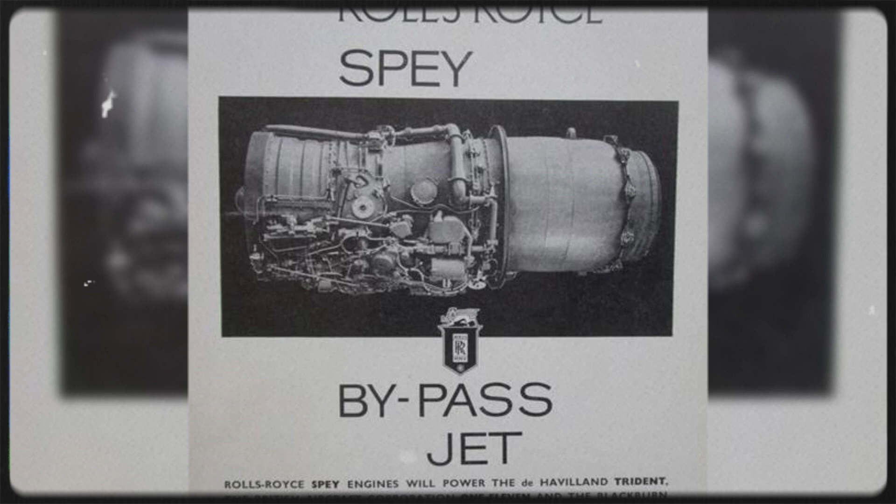They applied the twin-spool bypass principles of the Conway to a smaller, more efficient engine called the Spey, designed for short-haul passenger jets like the BAC-111 and the Hawker Siddeley Trident. The Spey was highly successful, keeping the Derby production lines moving. But the transatlantic heavy market, the prestigious arena the Conway had effectively invented, was slipping permanently out of British hands.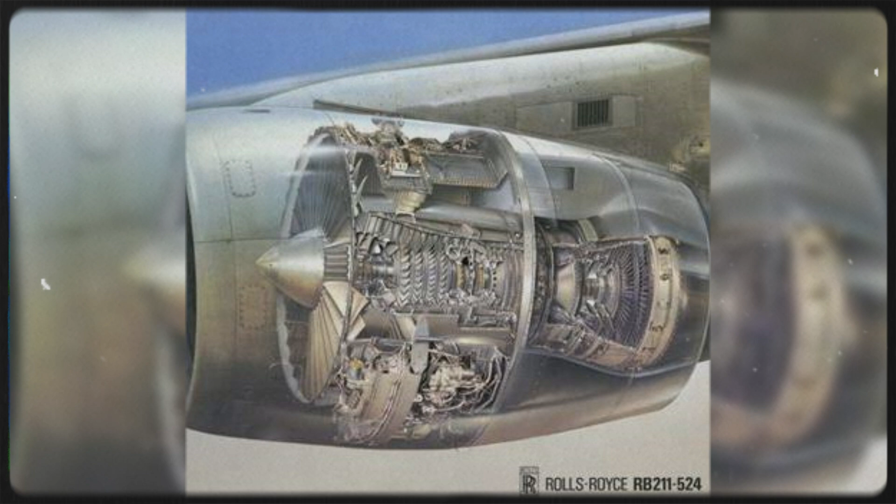By the late 1960s, the aviation market shifted again, and this time the scale was terrifying. Boeing announced the 747, the first wide-body jumbo jet. It required engines with thrust ratings approaching 40,000 pounds and a massive bypass ratio of 5-to-1. The Conway architecture, with its narrow core and 0.3-to-1 bypass ratio, was completely useless for this new era. You could not simply scale it up. The internal thermodynamics were mathematically locked.

To stay in the global race, Rolls-Royce had to abandon the Conway lineage entirely and begin developing an entirely new, incredibly complex high-bypass turbofan known as the RB211. This was the ultimate tragedy of the Conway. It had proven that the turbofan was the only way forward, but competing in the high-bypass era required a level of financial investment that was unsustainable for a private British company.

The development of the RB211 was so technologically punishing and the manufacturing costs so catastrophic that it pushed Rolls-Royce into receivership. In 1971, the British government was forced to step in and nationalize, the process where the state takes ownership or control of a company to prevent its total collapse, the Aero Engine Division. The company that had built the Merlin and the Conway was effectively bankrupt, crushed by the financial gravity of the very technological arms race it had started.

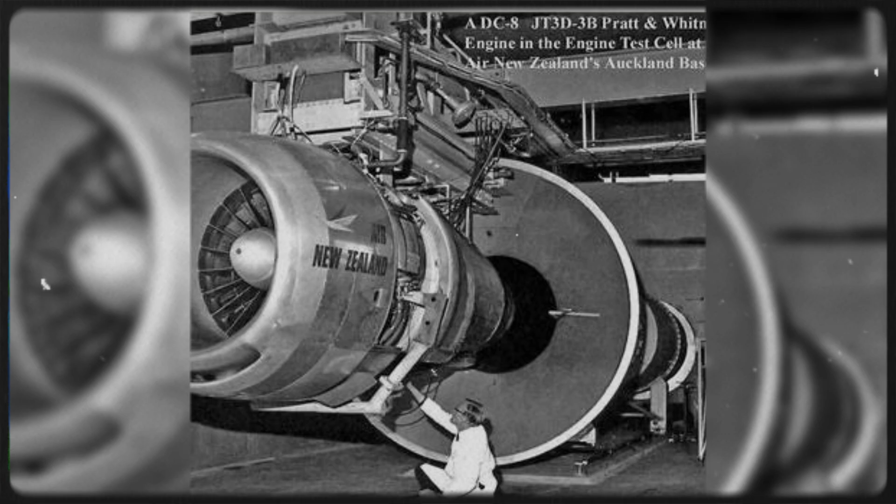As the company reorganized under state control, the physical presence of the Conway began to fade from the world's major airports. The early Boeing 707-420s and Douglas DC-8s that had proudly carried British power across the Atlantic were slowly sold off. They found second lives with charter airlines and freight operators in South America, Africa, and the Middle East. In the maintenance hangars, the service network began to shrink. Parts for the twin-spool core became harder to source. The foundries in the Midlands were no longer pouring castings for the Conway. They were entirely consumed by the desperate effort to make the RB211 work.

Overhaul intervals, once the absolute pride of BOAC, became increasingly expensive as the supply chain contracted. When a secondary airline mechanic needed a replacement turbine blade or a specialized seal, they increasingly had to cannibalize older, grounded engines. Furthermore, the regulatory environment was shifting. While the Conway was quieter than the pure turbojets it replaced, it was still a low-bypass engine. As airports like London Heathrow and New York's JFK introduced stricter noise abatement rules in the 1970s, the deep, tearing roar of the Conway became a legal liability. The engine was increasingly restricted, fined, or banned from operating during night hours.

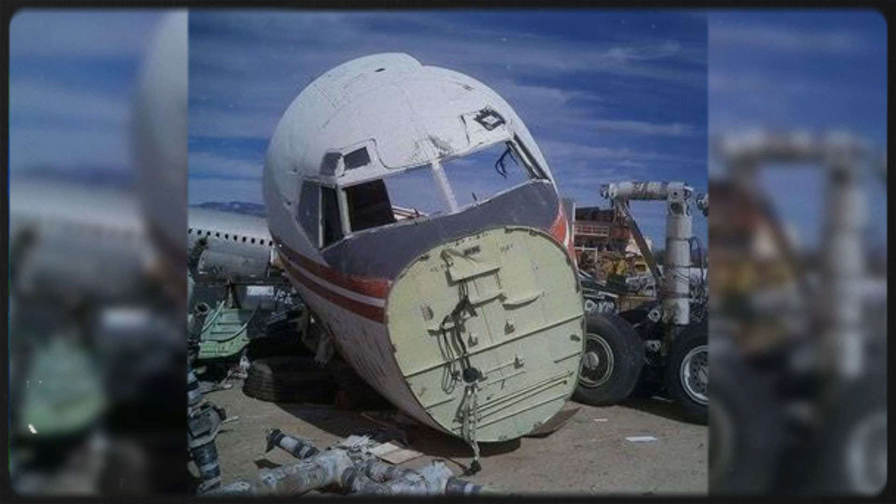When a Conway-powered airliner finally reached the end of its economic life, the end was undignified. At aircraft breakers' yards, the once revered power plants were unbolted from the wings, drained of their remaining oil, and left sitting on rusted engine stands. The aluminium casings, which had once represented the absolute pinnacle of British precision machining, were eventually cut up for scrap. The manual pages detailing the exact tolerances of the twin-spool bearings were thrown into the bins of aviation history, rendered obsolete by the massive, quiet turbofans of the new wide-body era.

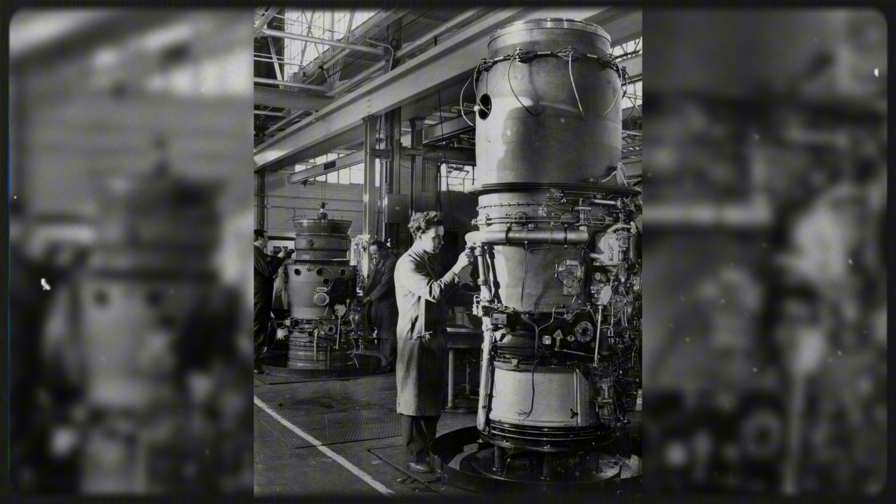For the British mechanics who had learned their trade on the Conway, the engine's twilight was deeply frustrating. They knew the block was still solid. They knew the thermodynamics were still sound. But a commercial aero engine cannot survive on engineering elegance alone. It requires a continuous flow of capital, factory tooling, noise certification, and airline fleet orders. Without them, even the most reliable engine eventually becomes too expensive to maintain.

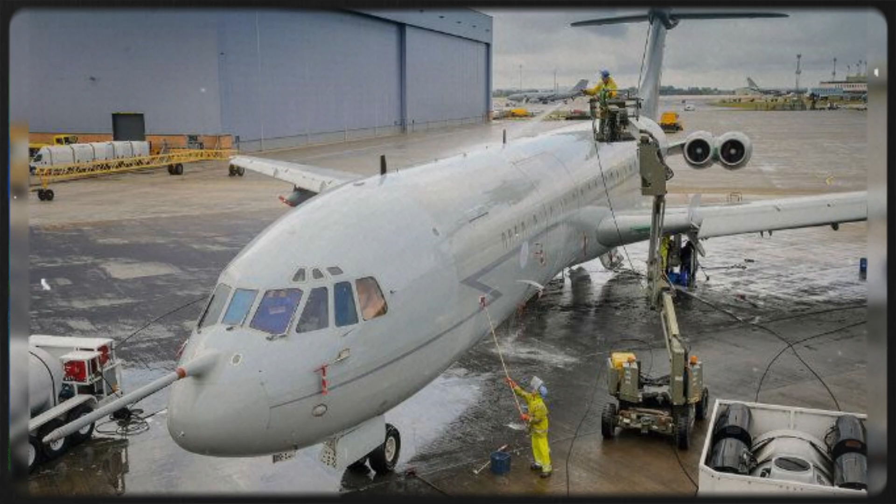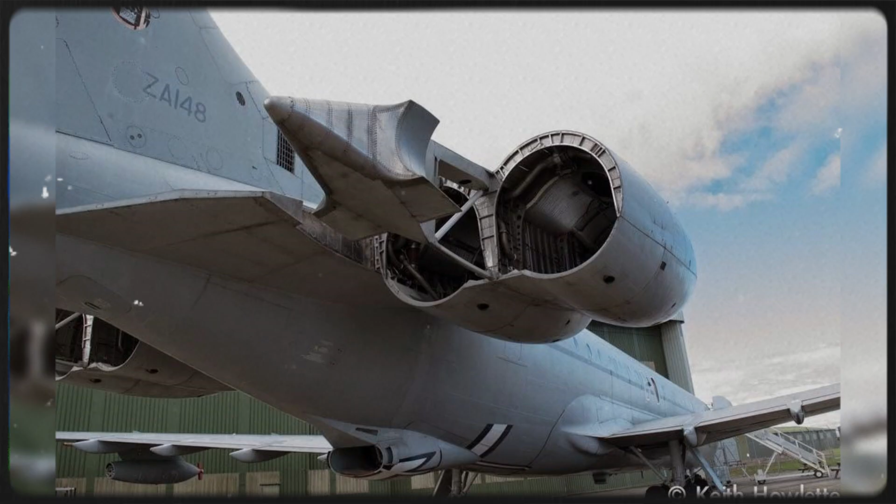By the late 1970s, the roar of the Conway was largely confined to the Royal Air Force. The military kept their fleet of Vickers VC10s flying as strategic transport and aerial refueling tankers, preserving the sound long after the commercial market had abandoned it. The military mechanics at RAF Brize Norton became the final custodians of Dr. A. Griffith's vision, keeping the complex architecture alive through sheer dedication and a dwindling supply of factory spares.

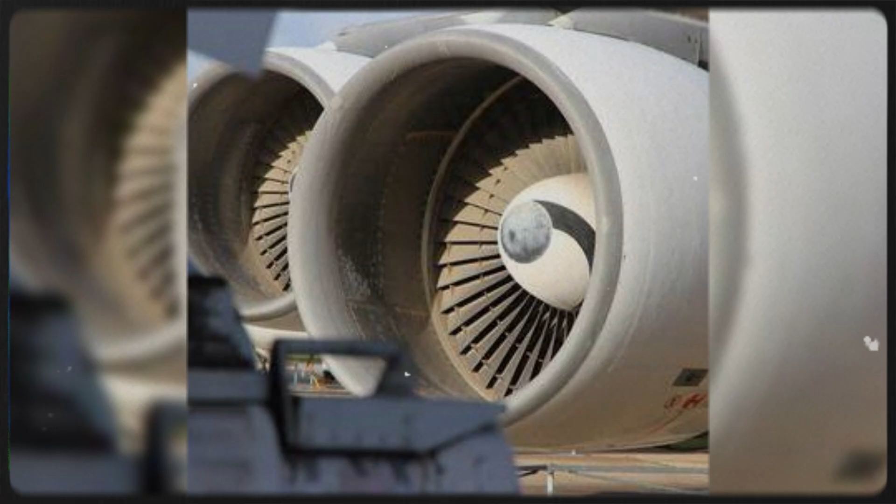But the commercial airspace belonged to the Americans. The high-bypass turbofans from Pratt & Whitney and General Electric had taken control of the transoceanic routes. The British invention had been overtaken by American scale. The engine still ran. The orders slowed. The American factories moved faster. The bypass ratio moved on.

The sound faded. The badge remained. The sky it conquered was gone. The Rolls-Royce Conway did not survive the brutal commercial realities of the 1970s, but the technological principle it proved became the undisputed foundation of modern global aviation.

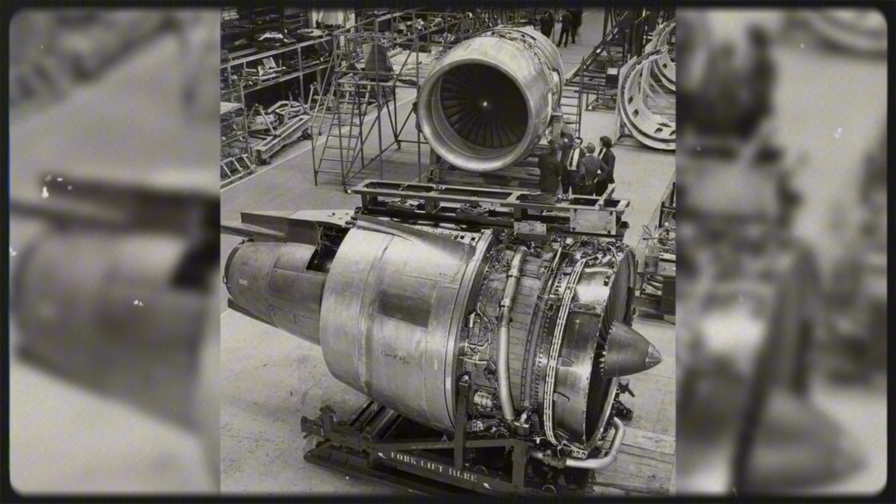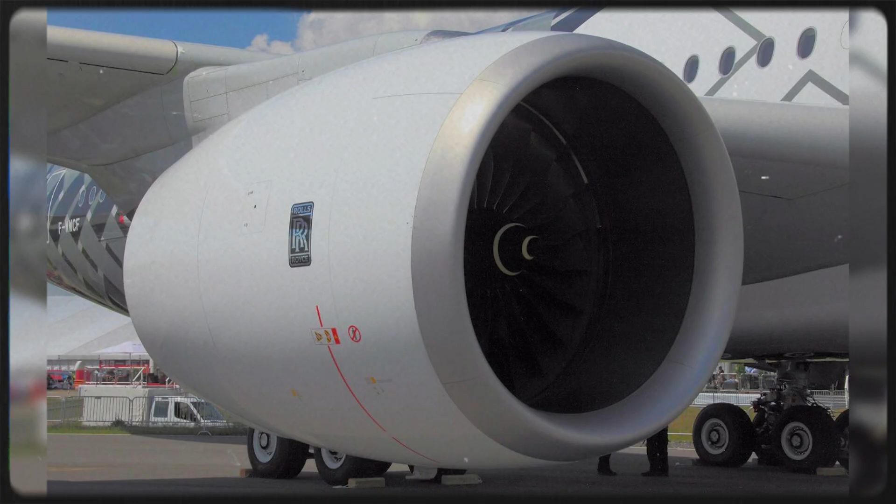Rolls-Royce, as a company, barely survived the transition. After the crushing nationalization of 1971, the process where the British state took ownership to prevent a total collapse of the aero engine division, the Derby Works were forced to abandon the Conway's fixed, low-bypass architecture. They took the painful, expensive lessons learned from the Conway and poured them into the RB211, which eventually evolved into

the Trent engine family. Today, those massive, high-bypass British turbofans dominate the skies, powering everything from the Airbus A350 to the Boeing 787. The Conway was the necessary, brilliant sacrifice that allowed the Midlands to learn how to build the future.

In Britain, the physical sound of the Conway was preserved for decades not by the commercial airlines, but by the Royal Air Force. While BOAC and the global carriers scrapped their Boeing 707s and early Vickers VC10s, the military kept their specialized VC10 fleet flying as strategic transport and aerial refueling tankers.

At RAF Brize Norton in Oxfordshire, generations of military mechanics and fitters treated the twin-spool engine with a mixture of reverence and frustration. For them, the Conway was not a museum piece. It was a daily reality of dripping oil, complex bearing alignments, and meticulous inspections. They kept the global supply lines connected, relying on dwindling stocks of factory spares and old, oil-stained service manuals.

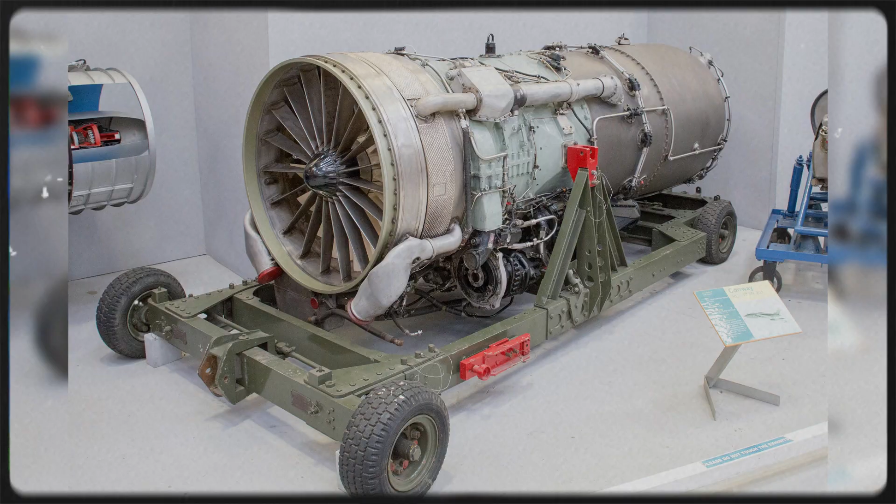Because of their stubborn dedication, the deep, tearing roar of four Conway engines launching a heavy tanker off a wet British runway remained a part of the national acoustic landscape all the way until 2013, long after the commercial world had gone quiet.

Today, the preservation of the Conway has moved from the active tarmac to the static, hushed halls of British institutions. At places like the Brooklands Museum in Surrey, the RAF Museum in Cosford, and the Imperial War Museum, Duxford, the massive cylinders of aluminium, titanium, and steel sit on heavy engine stands.

Enthusiast groups, retired BOAC mechanics, and aviation historians still pore over the surviving parts catalogs, tracing the incredibly precise tolerances that Dr. A. Griffith demanded back in the 1950s. They preserve the memory of a time when the British maintenance network had to learn an entirely new language of thermodynamics to keep the country in the air.

This is not nostalgia. A Rolls-Royce Conway sitting under museum light is a physical argument about a specific moment in industrial history. It proves that there was a time when a British engineering firm could fundamentally alter the mathematics of global travel. Before the Conway, commercial flight was a screaming, fuel-thirsty luxury that struggled to cross oceans reliably.

By proving that the bypass principle, forcing a sleeve of cool air around a burning core to generate thrust and save fuel, was mechanically viable, the Conway built the bridge to the modern world. Every time a modern passenger boards a wide-body airliner, they are relying on the exact thermodynamic theory that British labour proved in the Midlands over six decades ago.

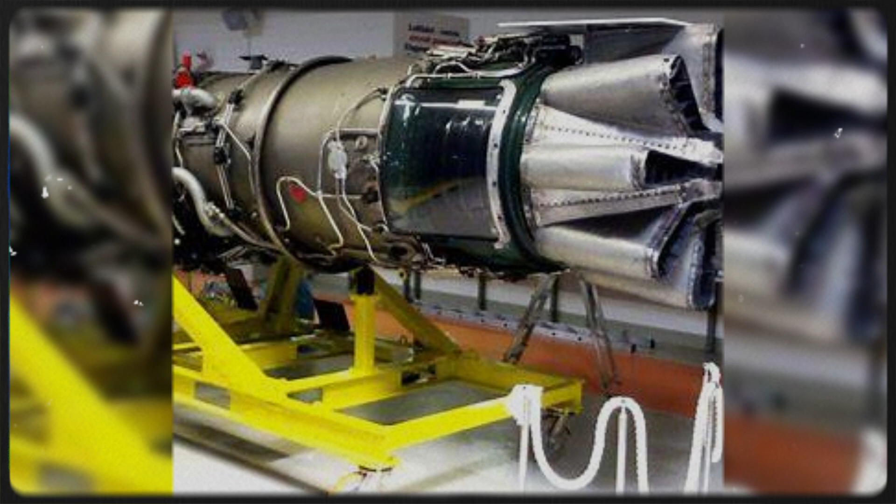As a surprise footnote to its legacy, the Conway's accidental byproduct, its quieter acoustic signature, actually helped shape modern urban geography. By proving that a jet engine could be muffled by its own bypass air, the Conway laid the mechanical groundwork for modern noise abatement rules. It proved to regulators that massive international airports like London Heathrow could expand without completely deafening the cities that surrounded them.

The tragedy of the Conway was never a failure of engineering. It was a masterpiece of mid-century thermodynamics. Its twin-spool architecture was a triumph of Midlands machining, and its reliability in the hangars set standards that the rest of the world envied. But the Conway stands as a brutal reminder of the forces that govern the British engine market.

It proved that an engine could be mathematically perfect, historically important, and universally respected by pilots and mechanics, yet still lose its world because of manufacturing costs, competitive scale, and the relentless pressure of global supply chains. The engine had taught Britain to trust a new kind of sound, but it had not solved what would happen when that sound became too expensive to adapt.

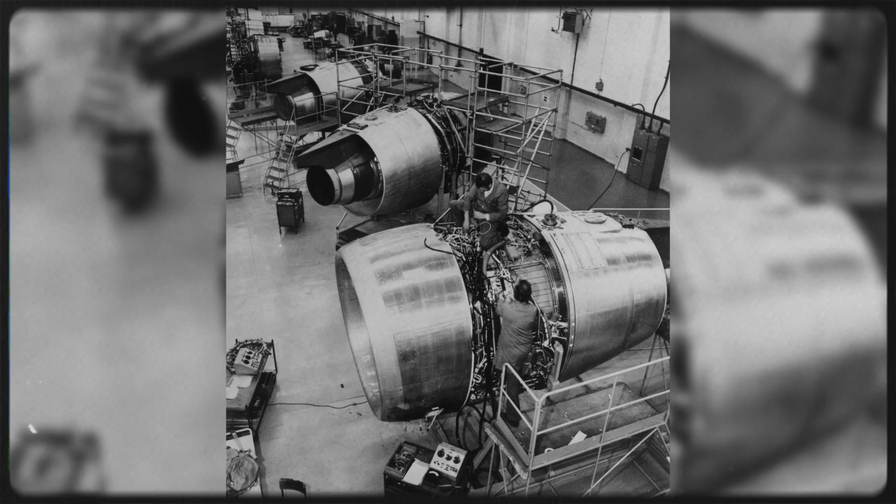Pratt and Whitney and Boeing did not beat the Conway with better theory. They beat it with volume, flexibility, and the harsh realities of commercial economics. The Derby factories moved on. The mechanics who once knew the Conway's internal bearings by heart have largely retired, their knowledge fading into archival memory. What remains is the metal itself.

Somewhere in a British aviation museum, an old Rolls-Royce Conway still sits on an engine stand, the complex aluminium casing dulled by time and dust, the original badge still proudly visible on the front, waiting in absolute silence for a sky that the new industry no longer needs it to conquer.